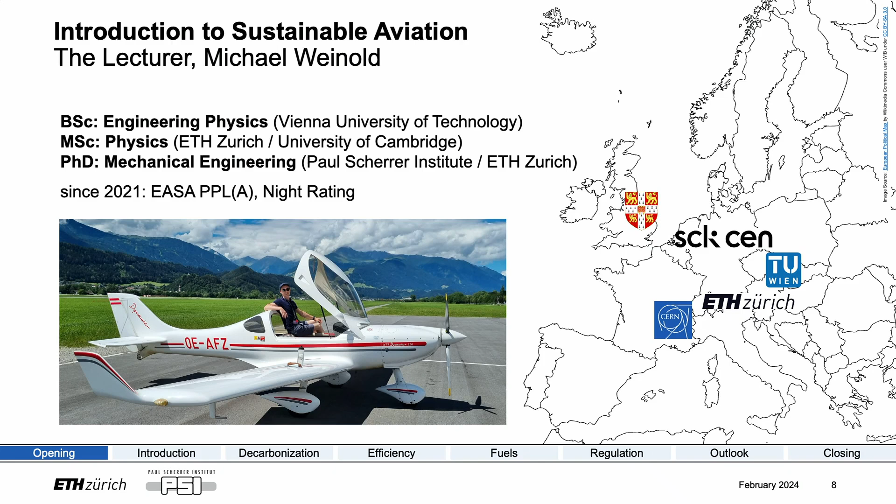Now, the research that we do, both at Paul Scherrer Institute and ETH Zurich, is of course concerned not primarily with aviation, but aviation as one of the sectors with hard-to-abate carbon emissions is of particular interest to us, and we have aviation domain experts in our group, including our group head, who has a background in aerospace engineering from a university in the United Kingdom, and then various researchers who deal with questions of sustainable aviation fuels and the supply chain underlying them.

We've in the past collaborated with various entities of the Swiss government, with the European Union Aviation Safety Agency, Airbus, Synhelion, and EMPA. So if students are looking for either a bachelor's, master's, or project thesis, I encourage you to check the websites. There's various opportunities. Of course, we're not as hands-on as some of the student projects that actually build aircraft, either hydrogen or battery-powered, but we take a system-level approach. So if you're interested in modeling, computer science, I encourage you to take a look.

Now, something definitional. Sustainability, of course, is a very broad term, an umbrella term, but what I'll be focusing on in this lecture, also because that's primarily what I've been dealing with in my own doctoral research, is sustainability in the environmental sense. So we won't be delving too deeply into the economic implications of, for instance, switching to different fuels. But we'll take a look at sustainability in the sense that we'd like to continue flying for the foreseeable future without accumulating environmental burdens.

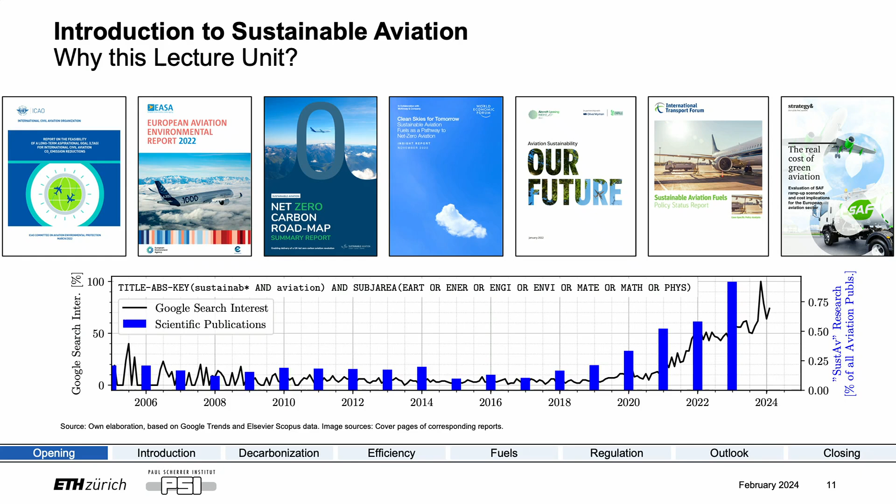We are in Switzerland, of course, very fortunate to have, considering the size of the country, a very strong aviation industry, and I've just selected a couple of entities, and of course there is no mention of completeness here. Entities in Switzerland that deal with sustainability in aviation specifically. So, for instance, the European Flight Academy, that's training aspiring Lufthansa and Swiss Air pilots, is soon to transition to battery-powered DA-40 aircraft, therefore decarbonizing completely at least one part of the flight training of aspiring pilots.

We have Swiss, who is active in the adoption of sustainable aviation fuel, as is the Lufthansa Group at large. IATA has entire teams working on assisting airlines in both meeting the reporting standards for emissions that have been implemented by ICAO and in transitioning to more sustainable fuels. Skyguide has projects, so the club has hosted an event only very recently where we had Christian Weiss, senior staff from Skyguide, mentioning what they're doing and trying to decarbonize Swiss airspace.

So the goal of today's lecture is perhaps not so much to prepare you for the exam. As many of the students who've already taken Aviation 1 know, there's only 1 or 2 questions from this lecture that are going to make it into the exam, but it's much more trying to give you a high-level overview of the topic and contextualize, as I've mentioned, other reports.

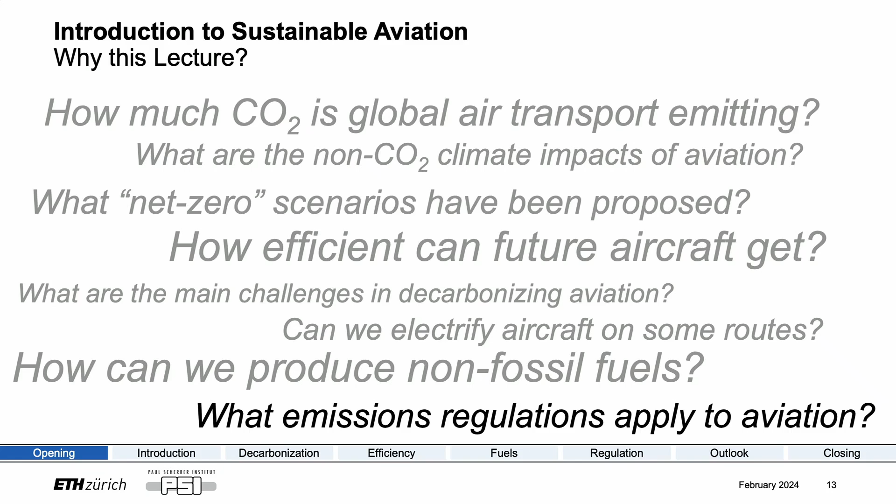So the table of contents is as follows. We have a short introduction that's supposed to motivate the lecture: aviation and the environment, aviation and technological change, and no simple solutions, which is a bit unfortunate, but at the same time, perhaps the reason why I have to hold this lecture in the first place. Then a brief section trying to split up the topic into 3 levers accessible to policymakers: increasing efficiency, making fuels non-fossil or at least decreasing the carbon footprint of the fuels, and regulating aviation. That could either be carbon taxation, carbon offsets, efficiency limits, fuel blend mandates, or flight bans, as has recently been introduced in France. A little spoiler alert, even though evidently a flight ban has been imposed on some short-haul domestic routes, none of them are actually affected, so that's quite the case study in how a bill becomes law. And then an outlook at the very end. Good.

Short introduction. So maybe just for context, the first powered flight, 1903, Wright brothers in Kitty Hawk, a 12-horsepower motor, flight distance just short of the wingspan of the Lockheed Constellation, which was incidentally also the last aircraft that Orville Wright was ever able to fly, in a flight organized by, well, the name eludes me now, but shortly before his death he was able to take to the skies again in a commercial passenger airliner where the wingspan was larger than the flight distance he had covered in his initial flight.

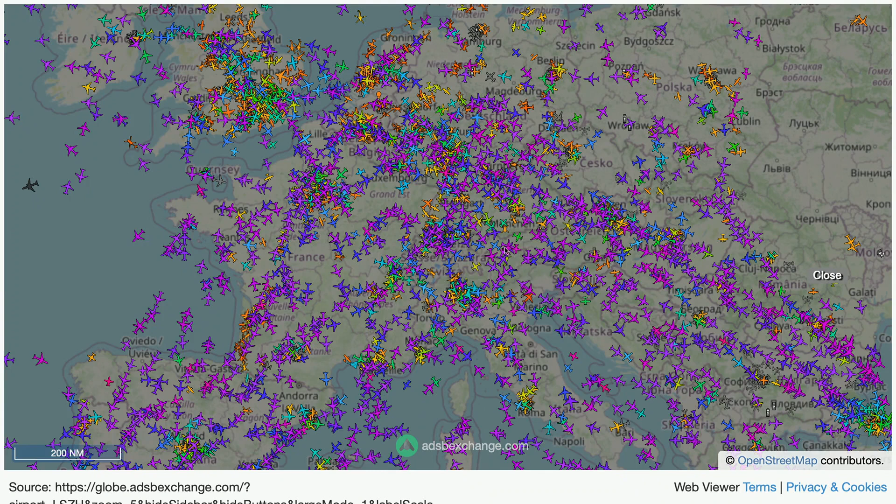This is a live picture of the sky above, well, it's centered around Switzerland, but it's really Europe. And I think you can even check where the aircraft are flying. So zooming into Switzerland, and maybe checking, coming back from Thailand. Well, so you can see air traffic has grown almost exponentially. I'll have some data on this, but I think it's instructive just to zoom out a little and get a visual feel of the amount of air traffic that's currently airborne.

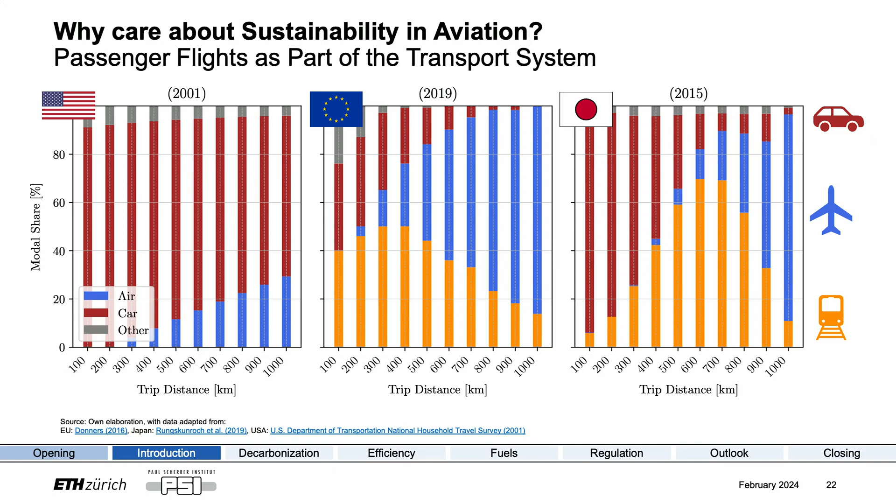This already gives you an idea of how difficult it is going to be to decarbonize aviation, or even through policy measures to enact effective measures to reduce unnecessary air travel. Because even for cases where there is significant economic advantage, there is still a large market for air transport. We had Martin Tyler in the Aviation I course, an expert in air cargo who worked for CargoLogic for a long time, and students who took Aviation I may remember some of the advantages of air transport when it comes to other modes of transport.

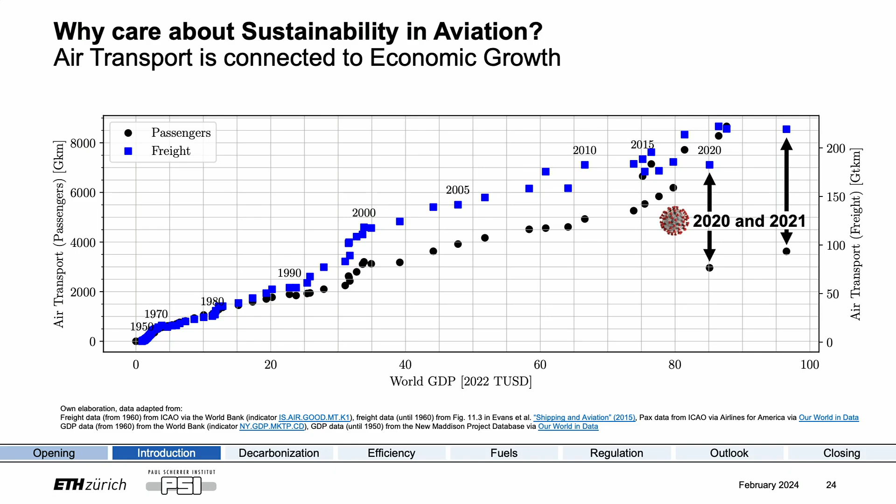Now, this is interesting. Of course, this is about as aggregate as you can get, looking at global GDP and global numbers of passenger kilometers. What's more interesting is to learn where growth will come from in the future, by looking at different countries.

What is reasonably well established is the regression, or correlation, between personal income and the propensity for air travel. What's also reasonably well established in economic literature is the bidirectional relationship between economic growth and air travel, especially in developing nations - which essentially translates to: if you can't fly between two cities, there's going to be very little commerce between them. So we can expect, as developing nations hopefully transition to service economies away from purely resource extraction economies, emissions from Africa and Asia to grow significantly, especially Southeast Asia.

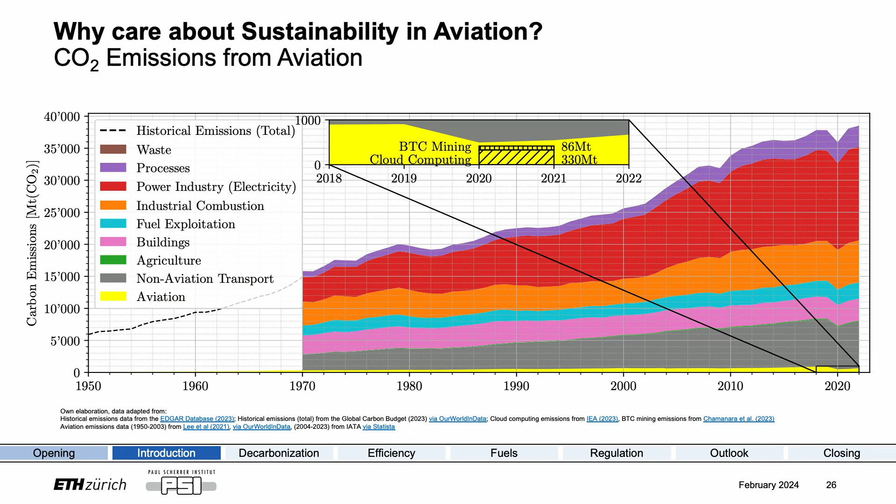Unfortunately, the non-CO2 emissions—any other warming that comes from changes in cloud cover, persistent contrails, direct interaction of radiation with aerosols and so on—is also significant, and at least on the same order of magnitude as the warming attributed to increased carbon emissions.

Now, you could ask how quickly we could reduce carbon emissions by, for instance, banning domestic flights or short-haul flights, or flights up to an arbitrary number of kilometers or hours flown.

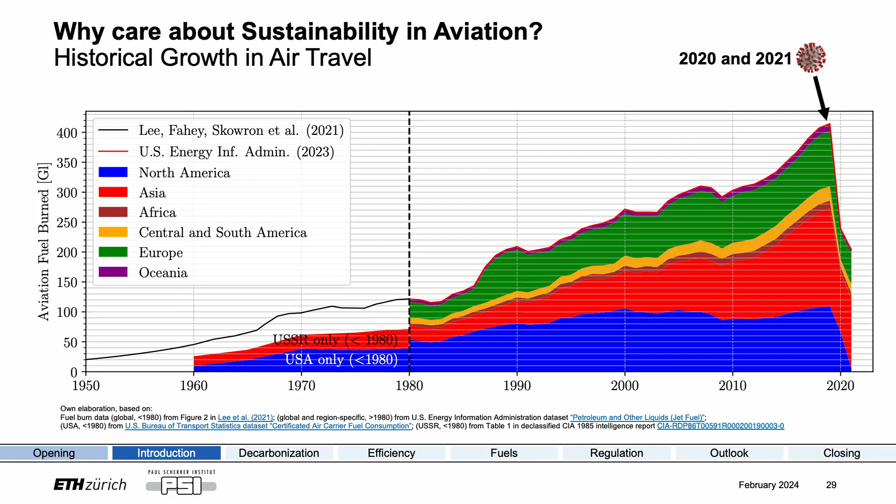About these emissions, we've seen that it's difficult to decarbonize aviation because we can't just ban short-haul flights, and even if we did, that wouldn't really make a dent in the overall emissions. We've seen where growth has taken us.

Now the question is, what are the actual emissions that we care about in aviation? Here I've classified emissions other than CO2 as other emissions, which is essentially noise emissions, particulate matter, and NOx and other soot particles. Now, all of these are essentially beyond the scope of this lecture.

We will have an aviation expert from the Federal Office of Civil Aviation, Theo Rendlisbacher, who's active in various committees of ICAO, actually writing the legislation that tries to find a trade-off between, for instance, fuel efficiency, so thermal efficiency in the turbofan engine, and NOx emissions. And I would ask you to direct all questions on these emissions to him.

There's some visually striking images, so we have made strides in, for instance, reducing particulate matter, because there's no more water-injected takeoffs, at least not in civil airliners, and even in the military ones. There's now more or less high bypass turbofan engines. In terms of noise emissions, relatively stringent rules are in place.

In fact, to my understanding, there is a chance that if noise emissions, which have been successively lowered by ICAO, continue to be lowered in this way, we might actually be able to grow globally noise neutral, which is a bit of an interesting term, but this would just mean that the global blanketed area that receives more than 55 decibels of day-night average sound would almost stay the same over the next 20 or the next 30 years, even at currently significant growth levels.

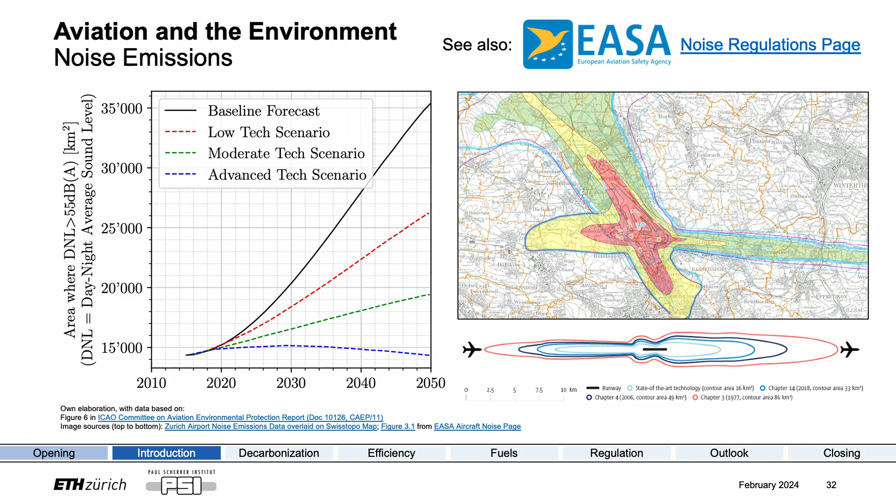So you can see that this is, I think, for—I don't quite know what decibel level this is, might be 79—but what you can see on the lower right here is how the blanketed area has decreased as per the different noise emission standards. And above that is an image that shows essentially the same for Zurich airports.

So what we are more interested in this lecture is warming effects of aviation, and this could be contrail cirrus. So these are high-altitude cirrus clouds that form from contrails. Could be low-altitude clouds that form from soot particles that are emitted into the atmosphere. Could be contrails themselves, although that's a negligible part. Could be sulfur in the atmosphere and other soot, and of course carbon dioxide.

Now, before I show a figure that shows you how much the atmosphere is actually warming from aviation, from both CO2 and these non-CO2 warming effects, I'll briefly have to show this for context.

What this shows is that there's two different kinds of emissions that we care about in aviation. One is the long-term emissions, which is carbon dioxide. This accumulates—you can see on the right-hand side—if aviation continues at present levels or even growth, then the levels of carbon dioxide, and from that resulting, the radiative forcing on the planet will increase, whereas there's short-term effects, like essentially all of these cloud effects, which are short-term on the timescales that we're interested in climate science, and they're essentially an emissions pulse.

So in the left figure, we are assuming an emissions pulse at time 0, and you can see that radiative forcing, and this would of course be a rather long-lived cloud if it actually stays up in the atmosphere for 20 years, but for visual consistency, I made that a very long-lived cloud. It decreases over time.

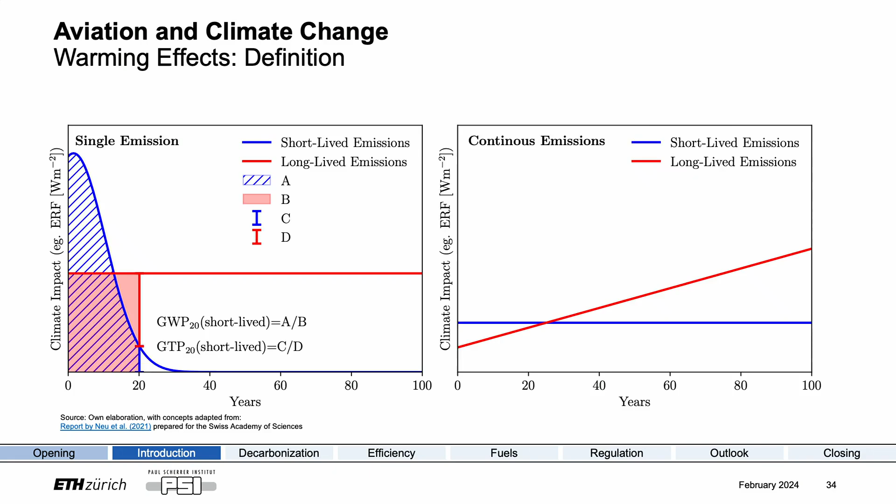Now, there's different metrics that you may or may not have already heard. There's global warming potential, there's global temperature potential, there's radiative forcing, there's effective radiative forcing. You don't have to care about most of them. What I'll be using will be effective radiative forcing, Strahlungsantrieb in German. The unit is watts per square meter, and this gives you a time slice in the warming equation, essentially.

There's an entire research group of the German Aerospace Center, DLR, in Oberpfaffenhofen that does only non-CO2 warming effects. And I've spoken to two of the researchers in preparation for the lecture. And this is centimeters per second updrafts that go into these models and essentially change the outcome from cooling to warming in these simulations. So it's complex physics or complex chemistry, like in the case of nitrogen oxide emissions.

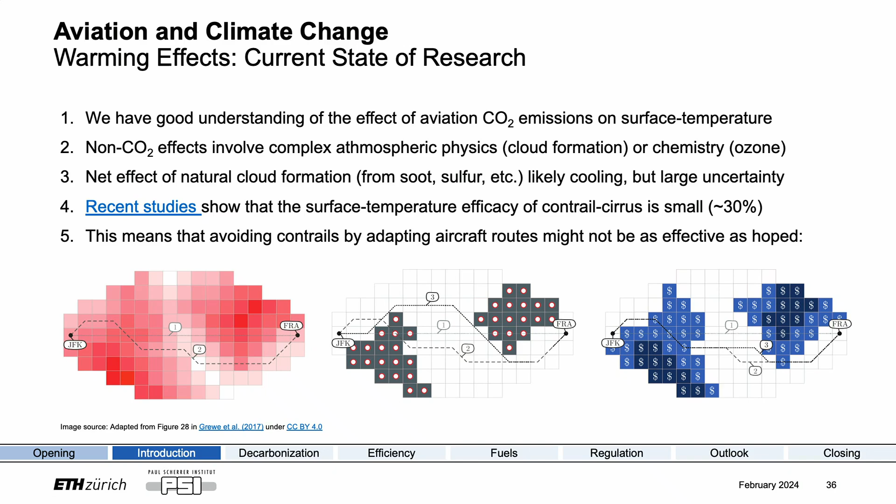So what people have suggested is making part of the airspace more expensive to fly through. This is very ambitious, not least of all because short-term weather forecasts are very difficult to generate. Google claimed very good results. I think they had a 2% fuel burn increase from rerouting or flying at different altitudes and a 50% decrease in contrails. But at the same time, a low efficacy in actual contrail warming would call this into question. So I would be very skeptical if any of these kinds of measures will be introduced in the short run. Also, because of this,

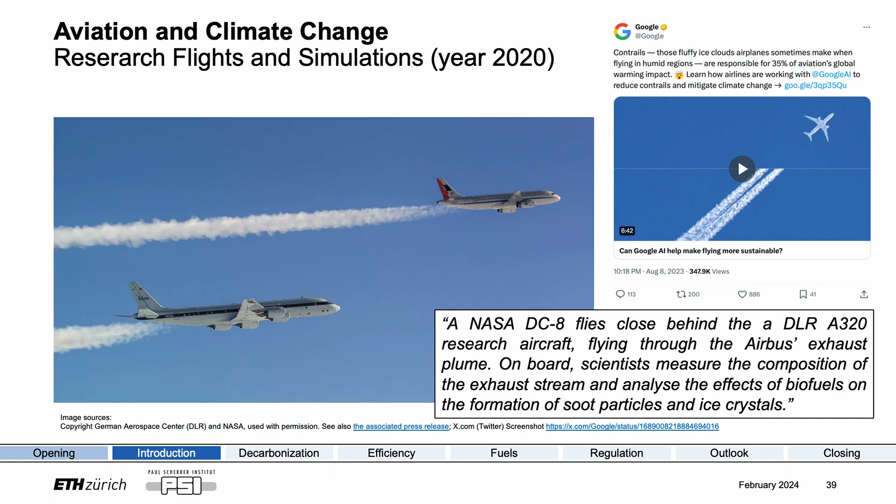Okay, so how much has aviation actually improved since the 1950s? And how much can we expect it to improve in the future? Well, it has improved by a lot, actually. Certainly more than any other mode of transport that I was able to find data on. I mean, there's really only three. I like this figure because it's for the United States, and I'm going to have you take a guess what happened in 1973. Yes, exactly. One of the many oil crises, or well, the OG oil crisis.

It's really funny, actually. So the two major shocks, the 2000s energy crisis and the 1973 oil crisis, were responsible for significant improvements. The Department of Energy introduced policy and funded research, etc. And the same is essentially true for aviation. So the next question is, why was there a significant increase in the energy intensity between 1950 and the 1970s for aviation?

Yes, exactly. This is fleet-level data. So in 1950, there was no commercial jet aircraft, and then they were introduced. So it really makes sense to compare the 1970s to today, but because I was able to find data all the way up to 1950, I decided to do that.

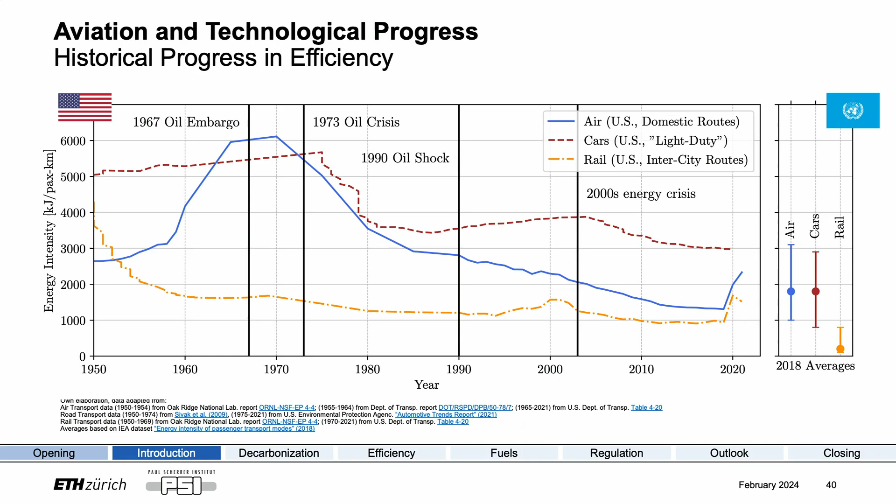It's essentially this. Steam power, diesel power, electric power. This is also captured here. So I do have rail data going back all the way to, I think, 1950 in the United States. And what you can actually see is there's still some steam engines that are being replaced in the figure before.

The issue is, of course, if you have higher efficiency in any appliance or service that consumes energy, what do you expect? Do you expect people to consume the same amount of the service or the appliance? No. This is called the rebound effect. And while I won't go into this in detail, we should keep this in mind. If there is no rebound effect, what this means is... Efficiency in these figures is the incline, the slope of the lines.

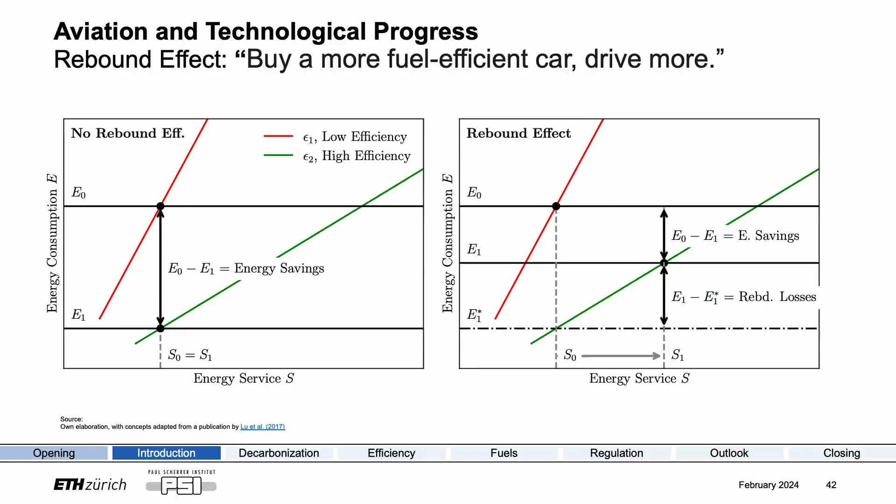You consume the same amount of the service, but due to higher efficiency, you consume less energy. If there is rebound effect, generally you expect to consume more of the service and thereby offset some of the gains. Of course, one part of the rebound effect is marketing, and this has been especially prevalent in automobiles and in cars.

But now, no simple solutions, or the reason why we have the lecture on sustainable aviation. Why not just electrify aviation? Well, the issue is essentially this. What I have plotted here is on the x-axis, the gravimetric energy density, so how much energy is there per kilogram in an energy carrier, and on the y-axis, the volumetric energy density, so how much per volume.

Kerosene, which might actually be an issue because kerosene in English isn't quite the same as Jet A-1, but it's about the same. It's between kerosene and gasoline. It is all the way up there on the far upper right. Hydrogen, of course, there's a split in the axis, simply because the gravimetric energy density of liquid hydrogen is very good, so about 3 times that of Jet A-1, German kerosene, aviation fuel. And then on the lower left we have batteries, and that's a bit of a disappointment.

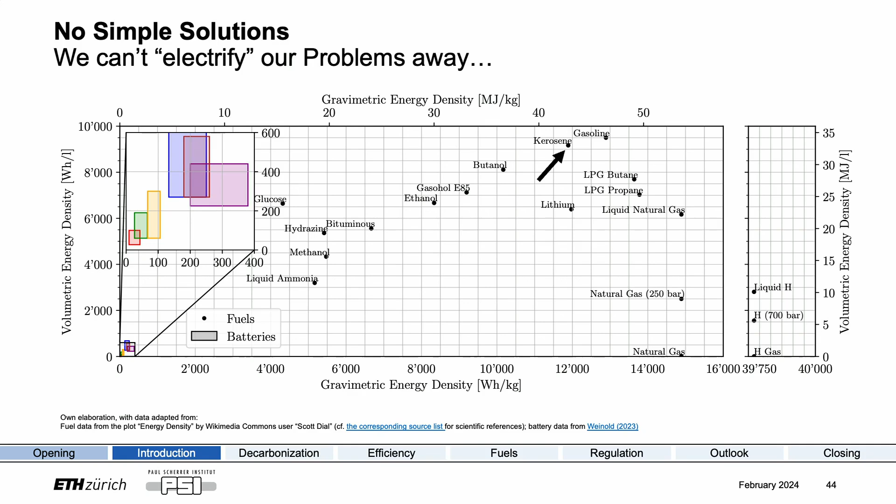We'll have to zoom into that, which we can do here. So there's the same axis, just zoomed in. Gravimetric energy density, which is more relevant to aircraft, and volumetric on the y-axis again. Now, the different colors correspond to different battery chemistries. The most prevalent, of course, being lithium-ion batteries, which are used from anything as small as this to the Tesla cars, which many of you may be driving.

And I've shown, and I think this is really instructive, the historical progress in the capacity of these batteries. Because when they were first commercialized, they certainly didn't have the same capacity as they do today. So you can see that for lithium-ion batteries, we start all the way down here in the 1990s. And 2020, the blue rectangle is the industry average, if you buy an off-the-shelf lithium-ion battery for presumably automotive use. And then the best performers are the little dots. We have 2 forecasts here, and I've added the physical limit.

So it's a very information-dense graphic, but this gives you all the information that you will need to assess whether you can actually replace aircraft on certain routes with battery electric aircraft. And for that I have data on the bottom figure. The bottom shows for commuter and for turboprop aircraft what share of the routes you could replace. This is based on estimates by the International Council on Clean Transportation. So the way we would read this is as follows.

We currently have an energy density of, like, 150 watt-hours per kilogram. That allows us to replace maybe 20% of commuter aircraft in the United States if we make them 15% less heavy. That's for lithium-ion batteries. At the physical limit, which at least according to current scientific estimates we'll almost reach, we'll be able to replace over 50% of commuter aircraft in the United States if they're 15% lighter.

Of course, no one's actually considering using lithium-ion batteries. What people are thinking of is more exotic battery chemistries that are not yet in use commercially: lithium air, lithium metal, and so on. I've added the physical limits for those also. So two of the limits are here. And current prototypes are this blackish gradient here.

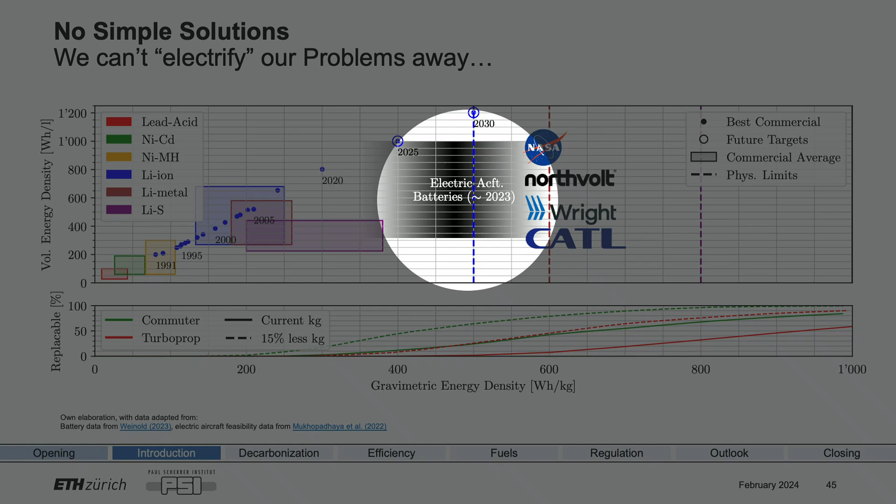So NASA, Northvolt, Wright, and CATL, which I think is a Chinese or a Taiwanese manufacturer, are all working on batteries for electric aircraft, and all the prototypes, not the projected future capacity, are in this range. So this means that there is hope to electrify aircraft on commuter routes, certainly. Turboprop aircraft, some of them, all of course depending on progress in batteries.

Progress in batteries is of course very much dependent on the number of batteries manufactured. This is called Wright's law. It's essentially a different version of Moore's law for processors, with Moore being improvement over time and Wright being improvement over implementation, so number of batteries manufactured.

Okay, so we can't electrify aircraft, or at least not all of them. So why don't we synth fuel our problems away? Why don't we use biofuels or synthetic fuels? Well, we can. Actually, if you fly to New York using any of the Lufthansa Group airlines, you can purchase sustainable aviation fuel that will be blended into the mix. Not just for your specific flight, because for certification reasons, not all aircraft can fly on 100% SAF. In fact, very few can currently. But much like with fair trade chocolate, Mengenausgleich, mass balance, this is added to other flights.

Unfortunately, it's a little more expensive. So current prices, I don't know how many of you have already purchased a ton of jet fuel, it puts you back around $1,000 currently. And SAF is all the way up there, in excess of 2,000. Singapore Airport wants to mandate all departing flights use SAF from, I think, 2026. But even the most liberal estimates from consulting agencies like McKinsey believe that this is going to be very much limited by the availability of synth fuels or biofuels in Singapore.

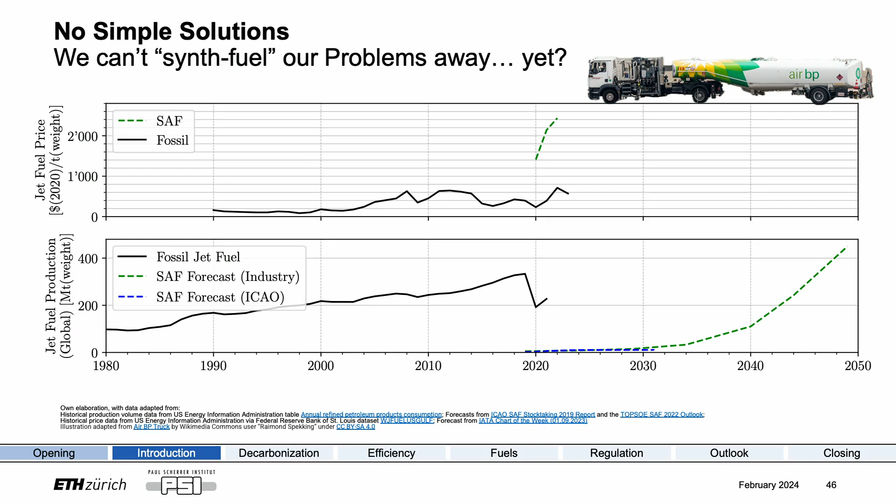Anyway, that's the forecast. Industry forecasts have this interesting tendency that whenever it's about implementation, they all grow exponentially, and when it's about reducing emissions, they fall exponentially. So you can see that here. Before I give you a short break, just some of the forecasts that are currently being used to try and estimate how we can get to net zero emissions by 2050. 2050, of course, being a very nice round number, no real bearing on reality. This is from Destination 2050, the European industry consortium, Waypoint 2050 being the American consortium.

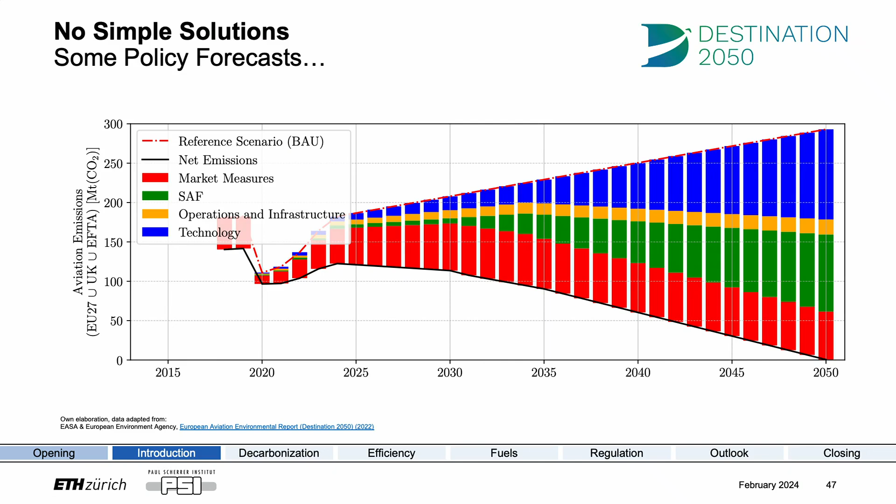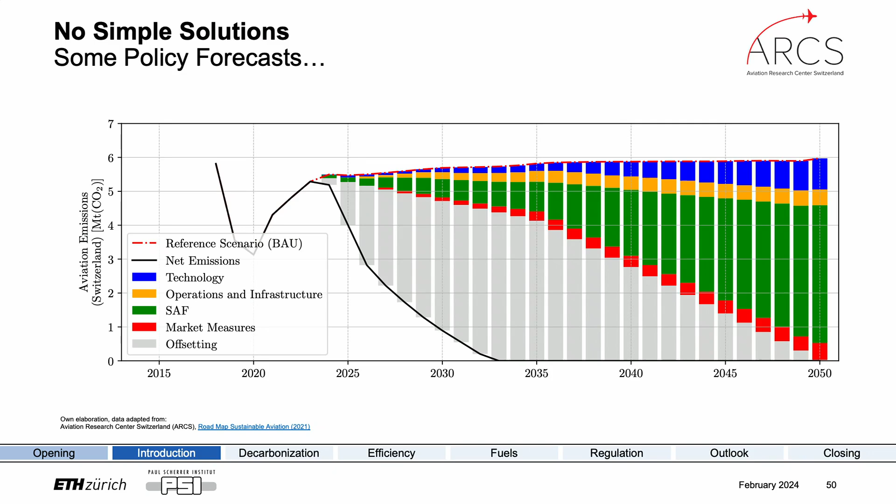And the people in St. Gallen believe we can just offset emissions forever. That's of course a bit of a misstatement, sorry for that. But here it's much more about offsets, and I'll get to offsets in the second part of the lecture. I've tried to compare them, and the lecture slides are going to be made available. But you can see that depending on the geographic locale, the policy environment, and the incentives behind whoever makes them, these forecasts are quite different.

And after the break, a 10-minute break, we'll go into all these different levers. So we have efficiency, we have policy, we have decarbonizing fuels. And that's essentially it. The key points are only for those that take the exam, so those are relevant. And I've added further reading and domain experts for your benefit, because the great thing about the course in general is that the guest lecturers are actually the people writing the legislation or informing the people who write the legislation.

I'm going to show you an equation, and I don't expect you to fully follow this, also because it's not really relevant. The relevant part comes on the next slide, but I would like you to have seen it at least once. This is called the Kaya identity. It's essentially a derivation of the IPAT formula, and all these names just go to say this is one way to split up the different levers we have to decarbonize any sector. Energy consumption, GDP, CO2 emissions, and population all go in there. Essentially, if you have a given population, the GDP per capita, the energy intensity per GDP, and the carbon intensity per energy, then you end up with carbon emissions.

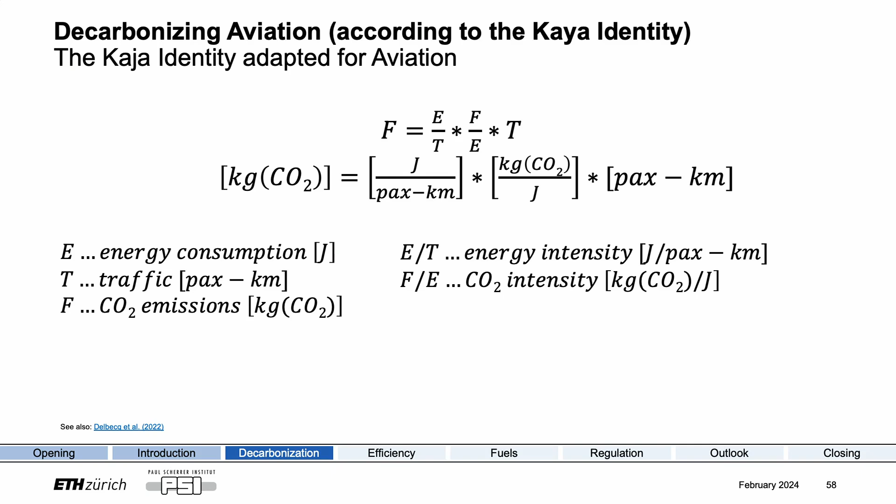Now, what's more interesting to us in aviation is if we adapt this slightly. It also makes this a lot easier. We have carbon emissions on the left side, E over T being the energy intensity per passenger kilometer, F over E being the carbon intensity per energy, and then the traffic. This formula gives us three factors, and along these three factors we will briefly proceed with this section. We have aircraft efficiency - new designs, new fuselage designs, new engine designs, new materials, etc. We have the fuel carbon intensity, which in this case is fixed. Generally, in the Kaya identity, this is dependent on the electricity mix, but in case of combustion engines, this is all in the carbon intensity of the fuel itself. And then we have the traffic, which is a proxy for the cost of flying or the availability of flying.

Now, you may have heard of Paul Ehrlich, a researcher, most prominent in the 1970s and 80s, who warned against the population explosion and the carrying capacity of the Earth. In his original IPAT equation, there was also the idea to reduce the world population, but since I have not yet degraded to the moral level of Paul Ehrlich, we'll set that aside for the moment.

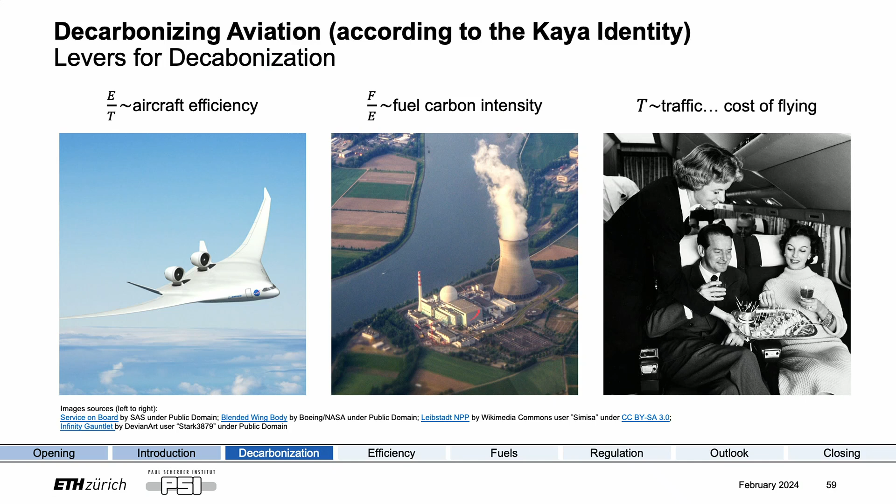Let's start with aviation emissions, aircraft efficiency. How has efficiency changed, and what are the physical limits, and how much can we expect this one lever to still contribute to decarbonizing aviation as a whole?

The 1950s benchmark is the de Havilland Comet, the first commercial jet airliner, a venerable aircraft that developed from the 1940s, first flight 1949, continued in service in a slightly modified version in the Royal Air Force until 2011, which I think is rather impressive - 110 built. Today's benchmark is the Boeing 787 Dreamliner, the first civil airliner with a composite fuselage, 80% composite by volume. Engines now, instead of having a 0:1 bypass ratio as was the case in the Comet, now have a 10:1 bypass ratio, and over 1,100 built.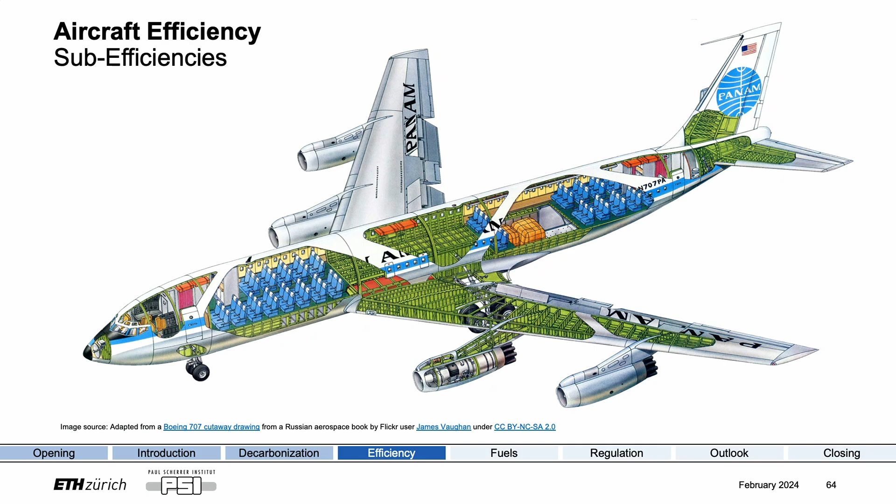If we look at aircraft efficiency, what scientific reports and forecasts usually do is they say, at the fleet level, over the past 10, 10, and 10 years, so the past 30 years in 10-year steps for whatever reason, we've seen a decrease of 2.4% annually compounded, which is quite impressive and the result of new aircraft entering service currently. But it's a very difficult metric to use because it's a compound metric and it really hides the fact that improvements in very different areas of material science, physics, and chemistry have led to this trend.

So what you actually have to do is not look at the overall efficiency, but split it up into engine efficiency, aerodynamic efficiency, structural efficiency, which essentially is a metric that describes how heavy the aircraft is in its ability to carry passengers and freight, and operational efficiency, which could be things such as load factor, so how full is the aircraft, but other things such as off-block time, how far the actual route or track deviates from the Great Circle route, etc. And all this makes up η, the overall aircraft efficiency or energy usage.

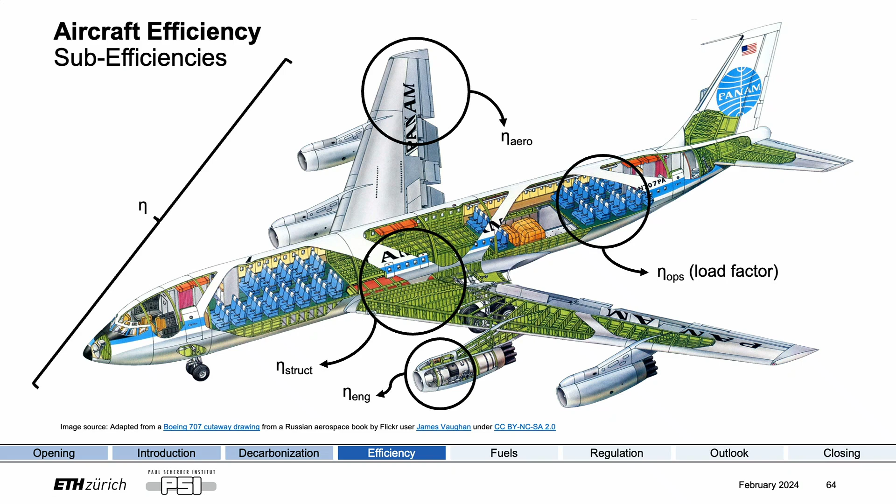Overall efficiency in units of megajoule per available seat kilometer, I'm calling that η here. There's various ways you can calculate this from open source data. Generally, this is a metric that is highly proprietary and closely guarded by OEMs. If you have ever had to deal with climate models or traffic models at the European level, you may know that Eurocontrol has good data called BADA, the Base of Aircraft Data. But even there, they do have the actual metrics provided by the suppliers. You have to sign a waiver saying that you won't compare two values. It's quite the disclaimer there.

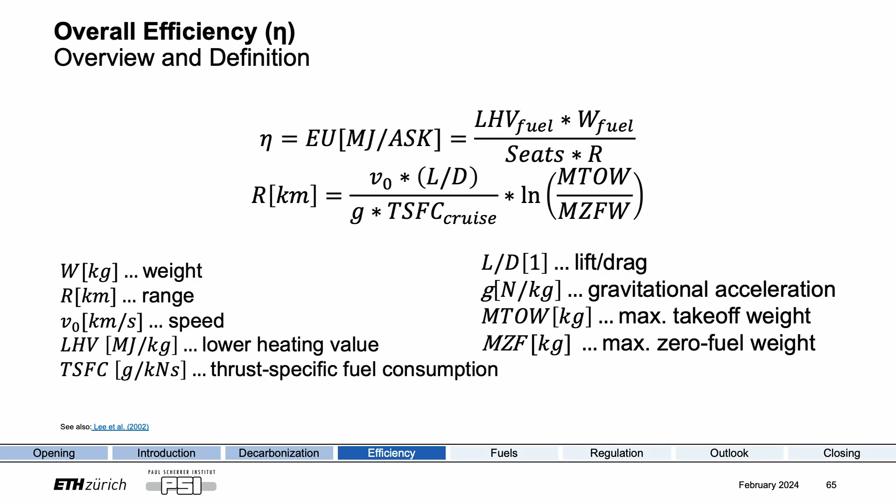I've included fleet average. Why are there some points that are worse than the fleet average? So why would you build an aircraft that has a lower energy, or rather higher energy usage, than the fleet average? Because it's a fancy aircraft with a fancy interior and less people inside. We've excluded those. So you're clearly describing the Gulfstream series of business jets, my favorite. But no, we've excluded those.

What this is, is smaller aircraft. But what you can see here is aircraft that are optimized for long range and for short range. So an Embraer 175 would have, we found, worse efficiency than, for instance, a 787, simply because it is optimized for takeoff and landing rather than cruise.

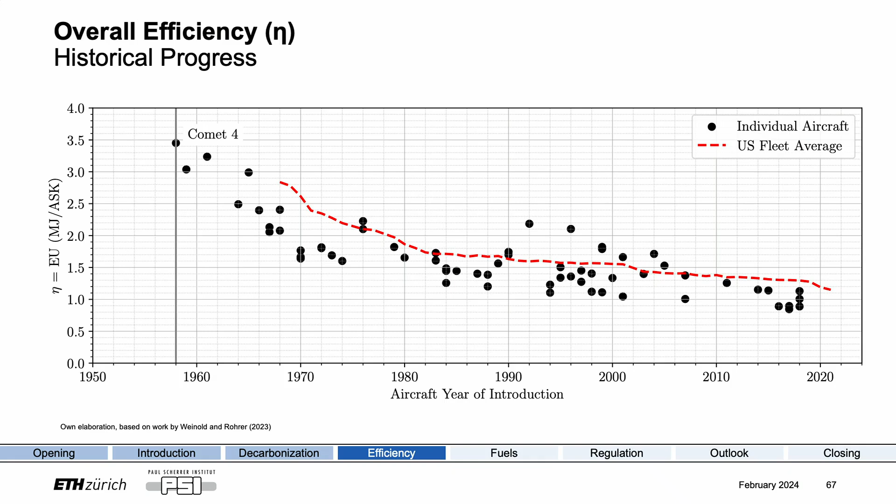And the question is, what was responsible for this? Fortunately, I had a master's student who was very good, by the way. We have spots for new master's students, if you're interested. And what I did with that master's student was disaggregate efficiency improvements in commercial aircraft. So we actually had a look at what was responsible. Was it the engines? Was it the aerodynamics? Was it the structure? And what we found was this.

Between 1958 and 2000, the majority came from engine efficiency improvements, the rest aerodynamics and structural. You can already see that it's a game of diminishing returns currently, and that over the past 20 years, aerodynamics have played the largest part.

Okay, we can start with structural efficiency. Let's delve into the sub-efficiencies. Structural efficiency just describes how heavy the aircraft is in relation to its utility in carrying passengers and freight. It's actually very difficult to find a metric that does all the aspects of an aircraft justice, including its speed, its range, its capacity to carry passengers and or freight.

So what we've done, since we had to do this from publicly available data, is use the operating empty weight over the passenger exit limit. Now, at the very end of the lecture, I'll get to something that ICAO has done to try and measure this, which is slightly different.

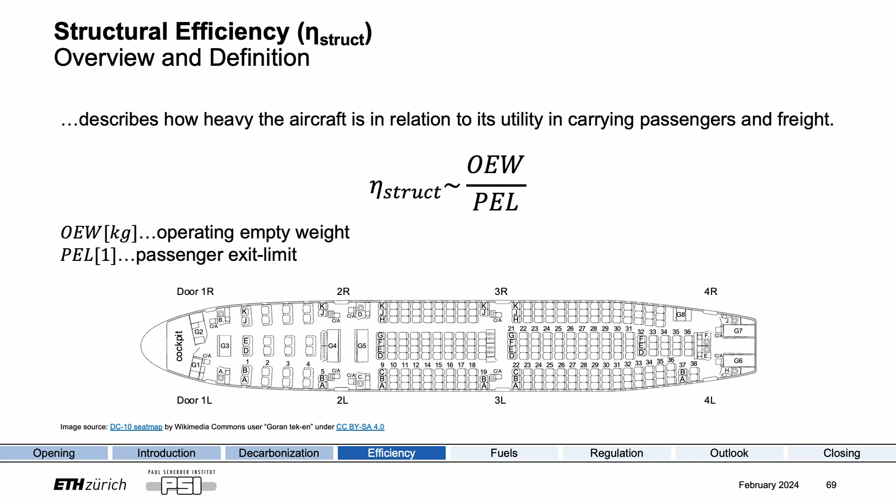We've used passenger exit limit, which is a certified limit rather than a technically feasible limit. That limit is also dependent on aircraft doors. So how many passengers you're allowed to fit into a plane is dependent on how many you can evacuate in 90 seconds, if I got that correct. This is dependent on the number of doors and the size of the doors, etc. So it's really an approximation, but it's the best we have.

We looked into this specifically for two aircraft, the 787, which is mostly composites, and the A330. I think the Neo, but that still is mostly aluminum. We found that the A330 has, in the variants we compared, shorter range and is also slightly slower. So this means the metric isn't able to capture everything.

Some things it does. We also see that lower is better. Wide bodies generally slightly worse.

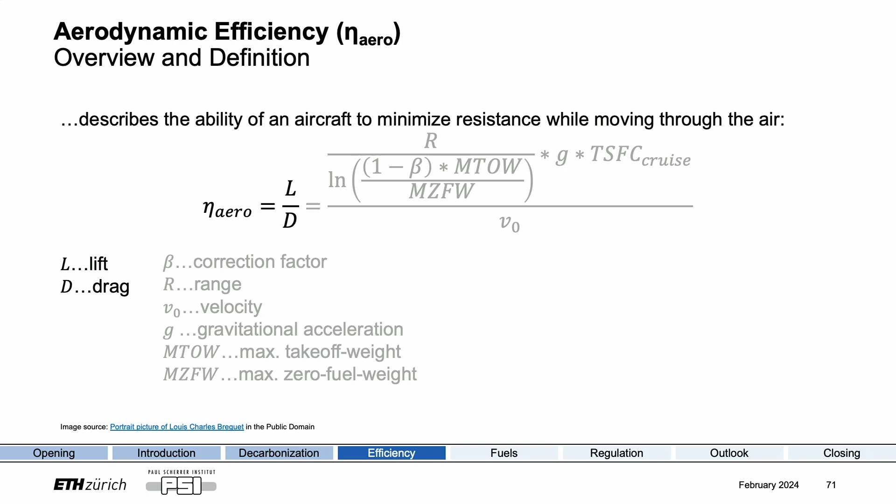Aerodynamic efficiency. We're essentially just using lift over drag. So if you remember Jürg Wildi, who has the aerodynamics lecture in Aviation 1, lift over drag we calculated by solving for it in the Breguet range equation, which I think Louis Breguet introduced, into which we're able to plug in the data that we have, and what we find then is this. And this is much more interesting, or visually appealing, if you will.

But we're essentially approaching the physical limits with current fuselage designs. There's some improvement still. I think Swiss recently introduced their shark skin, nano-textured foil made from polyethylene recycled bottles that gave them a 1.5% efficiency increase, I think, without fuel uplift. But this is diminishing returns. What you can see here also is that narrow bodies really are not optimized for cruise flight when it comes to lift over drag.

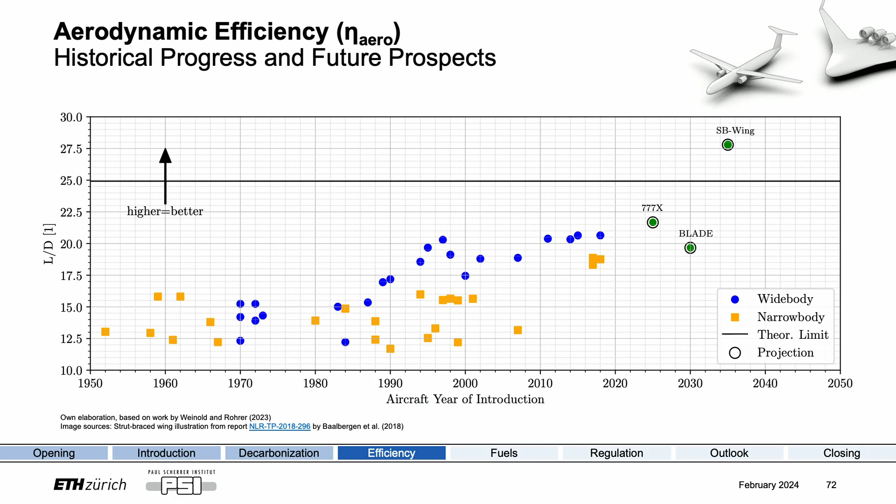Of course, one way to go above the current limits is by using blended wing bodies or a strut-braced wing. So strut-braced wing is the illustration on the left, and the blended wing body is on the right. I think Blade is a current Airbus or Boeing project. This would be one way to still improve efficiency when it comes to aerodynamics.

Engine efficiency is interesting because, as we've seen, between 1958 and 2000 it was responsible for the majority of improvement. We've split this up again into propulsive and thermodynamic, or thermal, efficiency. You can approximate propulsive efficiency by using exhaust velocity and velocity of the airplane, and thermal efficiency by using ambient and compressor exit temperature. The thermal efficiency is essentially the efficiency of the Brayton cycle. Turbofan engines fall into the category of the Brayton cycle.

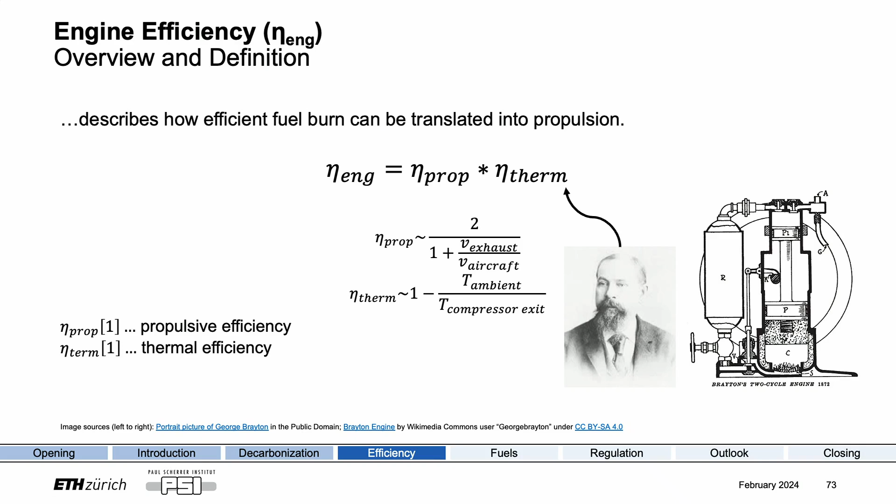And once you do this, you find that fuel burn improvement is essentially dependent on the bypass ratio, which is hidden in the propulsive efficiency equation. Generally, higher bypass ratio means lower overall exit velocity. And we're rapidly approaching viable limits.

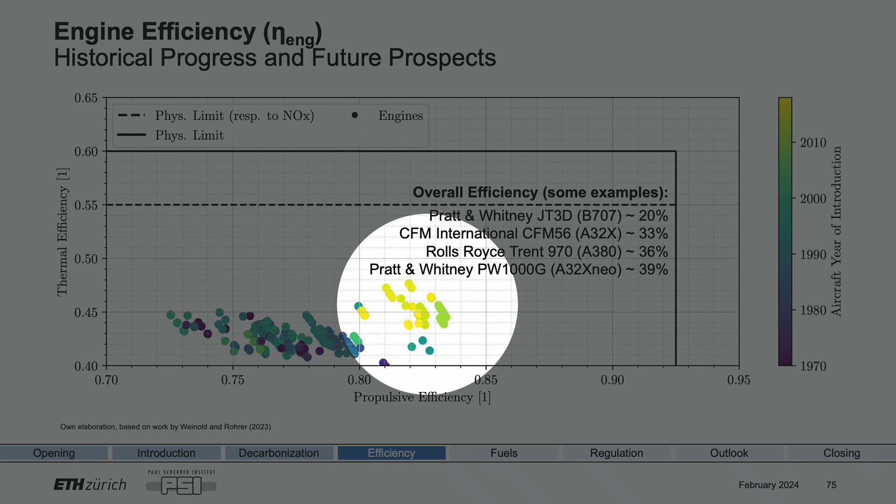This is only half interesting. What's really instructive is if we actually split up engine efficiency into propulsive and thermal, and then plot that. So we can see that, and here the color axis is essentially the year of introduction. We can see that the most recent engine generation, including geared turbofan engines like the Pratt & Whitney 1000, are in this cluster of lightly colored dots, and first and second generation turbofan engines are somewhere here.

The physical limit for thermal efficiency is non-negotiable. This is a matter of thermodynamics.

The physical limit with respect to NOx emissions is very much a matter of negotiations, and actually so in the most operational sense of the term, in that there are actual negotiations at the international level, at ICAO. Theo Rindlisbacher from Basel, who will hold one of the other lectures, so I encourage you to speak to him about this, is actually one of the people who has supplied test data, I think in collaboration with Helvetic Technik, or SR Technics, for the agency to make these determinations.

Higher core temperatures mean higher thermal efficiency. I think most of you have solved not a Brayton cycle, but maybe a Carnot cycle in your thermodynamics or physics classes. But higher temperatures also mean higher NOx emissions, and these are limited already, especially in the vicinity of airports, but also internationally. I've added some efficiencies here, so the engine that drove the 707 was around 20% overall efficient, and today we've almost doubled.

Now, operational efficiency is the last of the efficiency metrics. The only thing we've looked at here, because it's such a complex metric that hides how far routes deviate from the Great Circle route, what is the actual airborne time, what is the turnaround time, etc., is seat load factor, which is how many seats on average are filled.

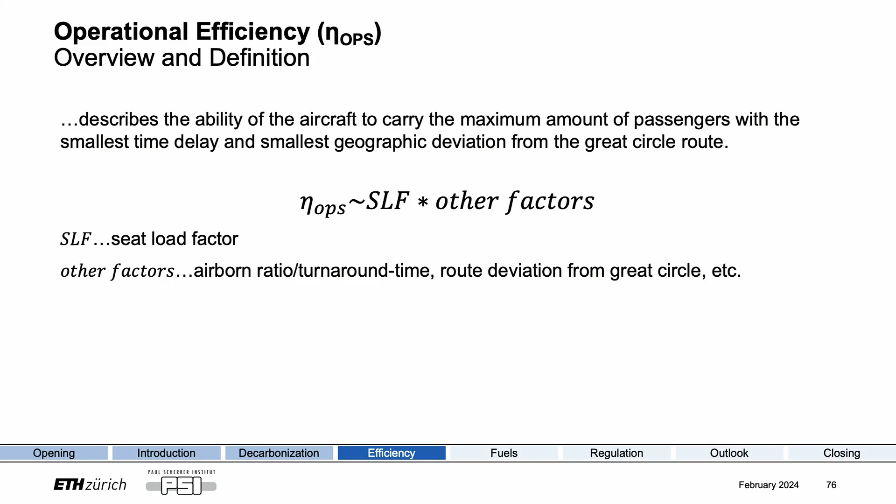I'm going to have you take a guess. At the fleet level, what is the current seat load factor of the international airline fleet in percent? It can't be higher than 100, that would be illegal. 60? Good guess, although maybe you're flying routes where there's not so much demand. It's actually a little higher. It's actually very high. Before COVID, it was approaching 80, 90% at the global level.

For some routes, of course, this is even higher. At least on all the Ryanair flights I've been on, it's certainly been higher. It was maybe even approaching 100. I've added rail transport occupancy rate also, just as a comparison. It's a bit of an apples to oranges comparison because rail transport serves a different purpose than air transport, at least in Europe. But still, Deutsche Bahn has an impressively high average occupancy of 50%.

So that's the one thing. This, by the way, also contributed significantly to overall energy usage reduction.

Just making sure, I just want to, in defense of Ryanair, from all the trips on DB I took, I think that they are at 120% occupancy. Yeah, certainly feels like that. Was it Ryanair that suggested that people actually stand in the back of the plane? Well, that would be approaching 100 or going above 100. Yeah, no.

I mentioned that we wouldn't go into this, but just because I was able to make such a nice figure, I'll show this also.

Operational efficiency also includes route deviations. And since part of this lecture is supposed to further your ability to ask critical questions, I don't know if you've actually read the My Studies description. I have 4 routes here, and there's, I think, 8 reasons for which the actual track deviates from the Great Circle track. Can you name all of them?

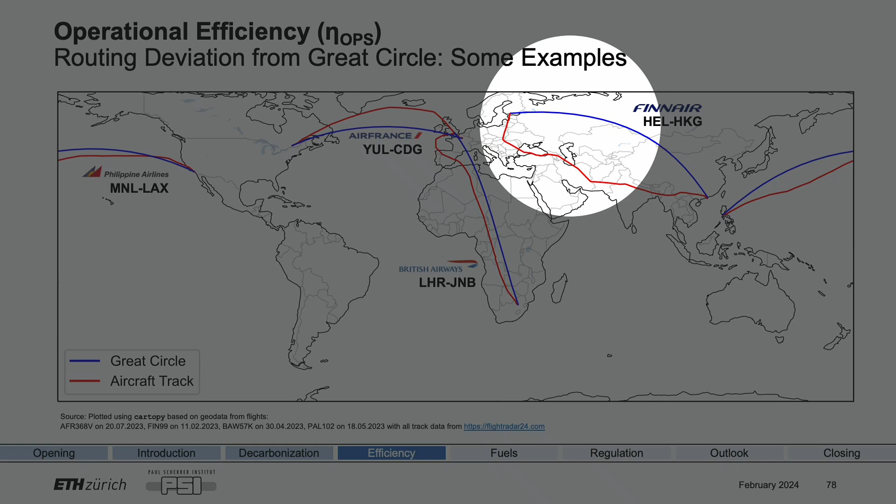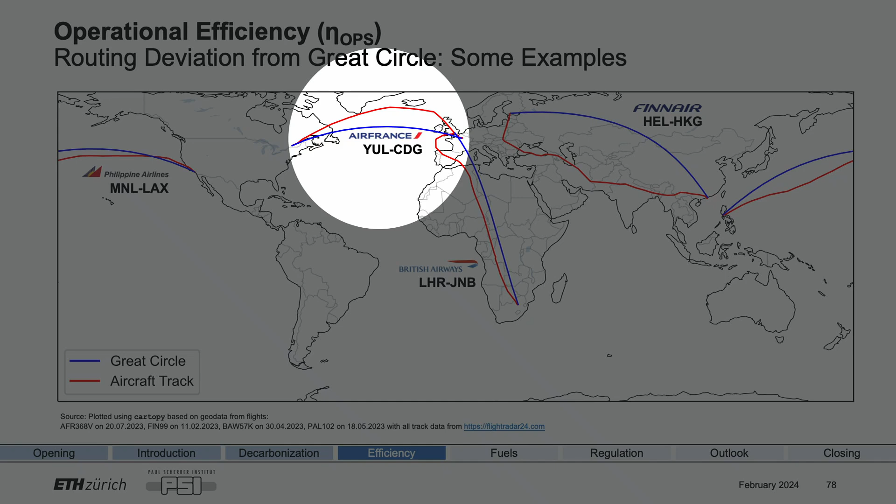And the interesting thing here is, this is a bit of a special flight. This was a delivery flight of an Airbus A220, a Bombardier C series, from Montreal to Charles de Gaulle. And evidently, the ETOPS rating, maybe only on that specific flight, or maybe for the aircraft in general, wasn't high enough, so they actually had to fly closer to Iceland. So that's another thing. I think you can see 2 more.

Yes? Yes, excellent, that's the one from Manila to LAX. So over the Central Pacific, there's no airspace closures, I don't think. So they actually chose to stay within prevailing winds, or well, maybe not jet stream in this case. And there's one more, this would be on London Heathrow to Johannesburg. This one's my favorite, I think you can see the strike of the French. Yes, the French are always on strike. So we could save the climate by just forcing them back to work. Yeah, so there's a couple of reasons.

There is research into how much the collapse of communism actually improved aircraft efficiency by Western airlines being able to overfly Russian airspace. Of course, we're in the reverse now. But this is all, unfortunately, beyond the scope of this lecture.

Okay, well, the key points were: looking at fleet level efficiency is only somewhat instructive. You need to look at sub-efficiencies, engine, aerodynamics, and structure, and operations, if you're interested. Energy intensity has decreased 90% compared to the Comet 1, but it's a bit of an unfair comparison, and 75% compared to the Comet 4.

Fleet level, around 50. The rate of improvements are likely to diminish unless revolutionary rather than evolutionary approaches are adopted, at least in fuselage design. You've seen that with the strut-braced wing and blended wing body. And potential for improvement in operational efficiency is small, but efforts are underway.

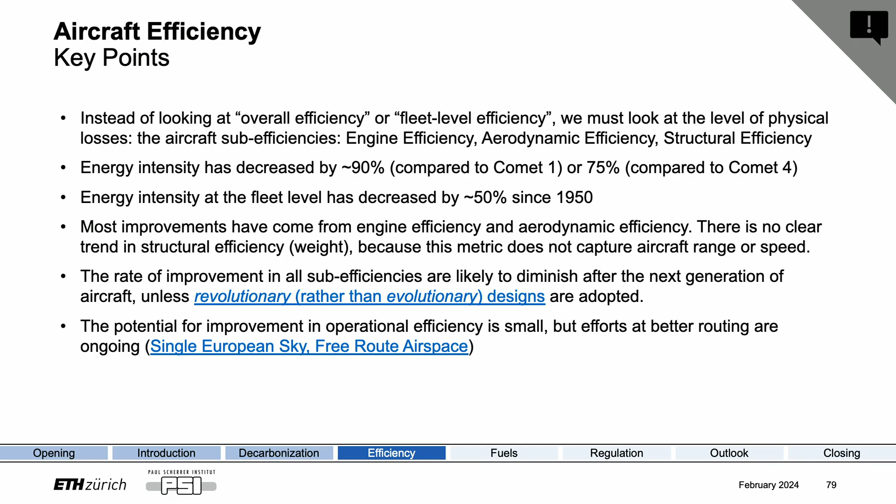Here I would actually encourage you to read some of this after the lecture's over. This is very interesting research, trying to really understand at the high level how we can improve the efficiency of the entire aircraft fleet.

Okay, so in the Kaya identity, we've looked at efficiency. We can now look at fuels, more specifically non-fossil fuels, because that would sort of be the whole point. Generally, when we talk about non-fossil fuels, we're talking about 2 kinds of fuels. We're talking about biofuels, or fuels derived from biological sources, or feedstocks, and synth fuels, or fuels derived synthetically, i.e. industrial chemically produced feedstocks, such as captured CO2, syngas, etc.

Now, how do you even measure the carbon footprint of fuels where the supply chain is really complex? Because the supply chain of these non-fossil fuels is really complex. Even the supply chain of fossil fuels is rather complex if you actually include the entire life cycle. The oil rig needs to be built. There needs to be maintenance on the oil rig. You need to actually ship the oil from the desert somewhere to a refinery, etc. The refinery has losses. All that incurs carbon emissions.

The method that's used to do this, and this is the expertise of the people in our group, and dare I say my own expertise, is life cycle assessment. It's a standardized methodology. There's an ISO standard for it, although that is rather vague. And that essentially determines the emissions that are incurred throughout the entire supply chain of a product or service, and the associated environmental burden.

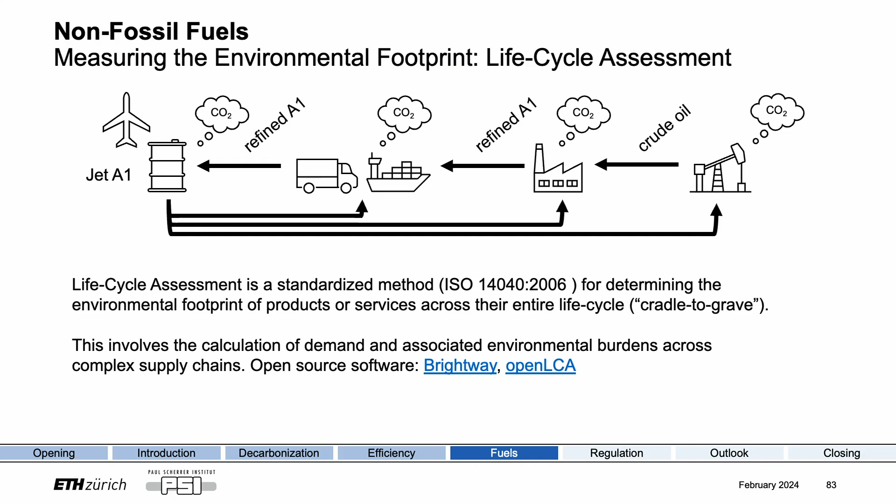There's two research groups in the United States that deal with this. There's one at MIT, the MIT LAE, Lab for Aerospace and the Environment, and there's one at Georgia Tech. It has a large aeronautics program, and the group at Georgia Tech actually calculates the carbon footprints that go into these tables that the ICAO, the International Civil Aviation Organization, has prepared that determine which supply path or which fuel path has which carbon footprint.

I'm not a chemist or a chemical engineer, but I will give you a very short overview of the different pathways that you can have to get to these different non-fossil fuels. So first we have biofuels, and they have this nice logo here spelling out CORSIA. I didn't write down what CORSIA actually means, but it's the ICAO program that does two things.

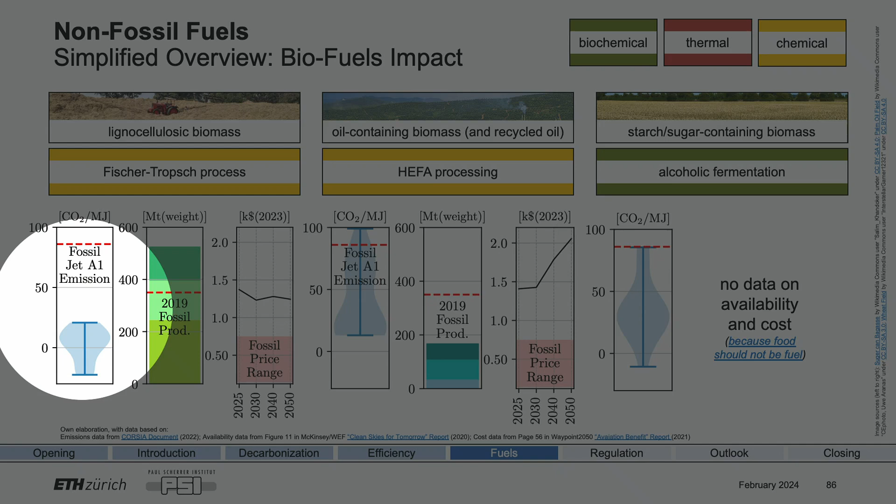These specific crops that make up the majority of the, as you can see, that's a distribution, so the majority of these fuels actually enrich the soil, so they sequester carbon into the soil, at least when compared to the crops that would have otherwise grown there, according to these studies. So there's that. It's a matter of which study to take and the assumptions. It's a bit unfortunate I can't go into this a little more. But this is the way it looks. So we would have enough, it would be very expensive, and the carbon footprint wouldn't be that bad.

Now, synfuels are slightly different. There's no biological precursors. Instead, we have nitrogen, electricity, water, and CO2, captured either during industrial production, or directly from the air. There's a Swiss startup that tries to do this in Iceland.

And there we have the other process, which you should be interested in if you want to pass the exam, or if you're interested in the history of civilization, which is the Haber-Bosch process, which does what? I'm sure everyone's heard of the Haber-Bosch process. Yes, it turns nitrogen and hydrogen into ammonia, which is the precursor for industrial fertilizer.

So it was the dynamite of the population explosion. And unfortunately, the reason World War I lasted 4 years and not 1, because again, Germany didn't have natural deposits of nitrogen, unlike the British did. So there's that. The pathway that is interesting to ETH students, or should be interesting, is this one. The solar redox cycle is something that an ETH startup is actively developing. Aldo Steinfeld's former group, professor just now retired, Department of Mechanical Engineering, has been working on this intensely.

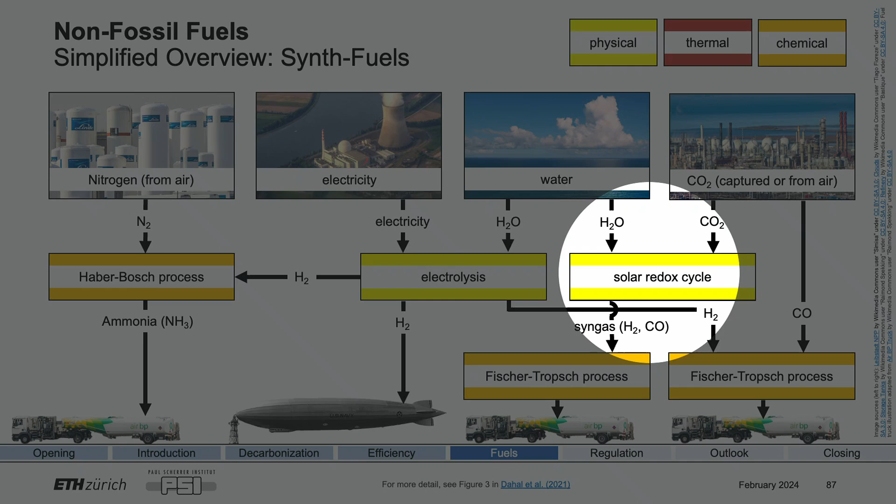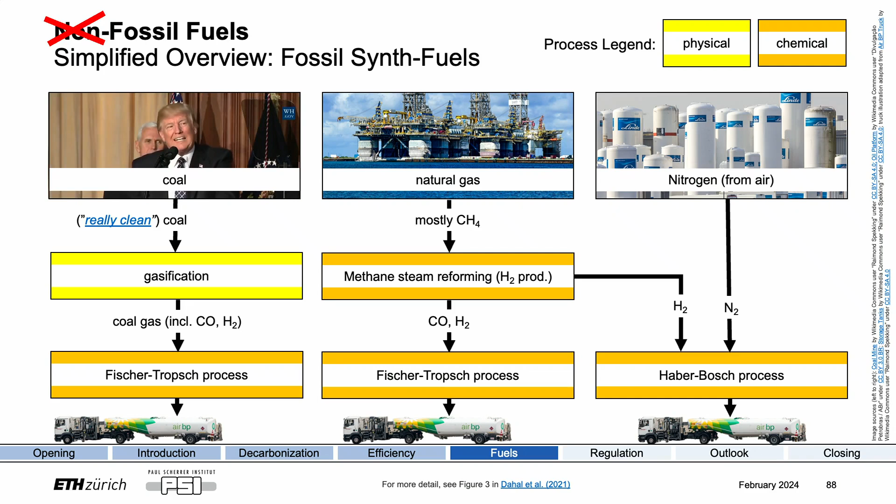For completeness, I've also included fossil fuel synfuel pathways, because there is a significant interest both in terms of research and in terms of scaling up from the militaries around the world, including some interest from Armasuisse, and of course the United States Army is one of the largest research agencies into non-fossil fuels. This is essentially the pathways that I mentioned earlier, relevant to German war efforts in the two world wars, and starts from coal. Going to have clean coal, really clean coal. And maybe if we have clean coal, it will be a non-fossil fuel, who knows? Natural gas and nitrogen.

Now, these are the pathways, so it's not so complicated. One thing I have left out is the refining, so there's other processes in there, but that's the gist of it.

Now that we have the fuel, can we actually fly with it? That's a good question. Yes, we can. Unfortunately, that's more of a certification issue than a technical issue. There has been a flight, is that November 28th? So I'm guessing that was then. So 3 months ago, across the Atlantic using 100% SAF. SAF made from,

did anyone actually read the press release? Did anyone hear about the 100% SAF flight? Do you know which pathway that was? It was oil. It was recycled cooking oil. So maybe Belgium will save the planet.

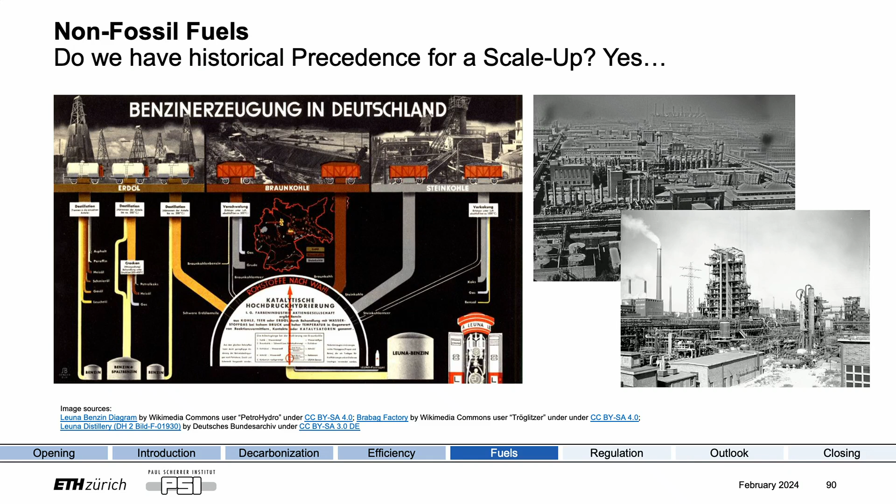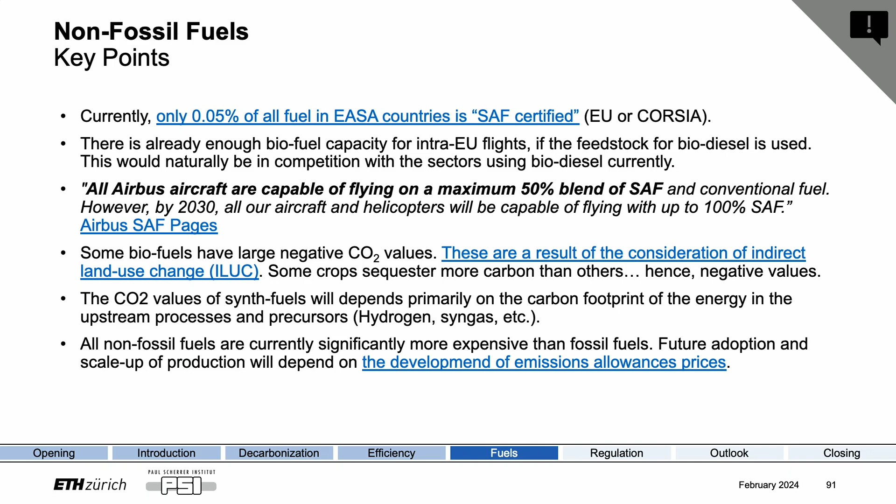Now, key points. 0.05% of the fuel in flights in EASA countries are using synfuel, or part of the blend is synfuel. There is enough capacity, although this would take away biodiesel, for instance, from other sectors, so it's always a competition between sectors. Airbus aircraft are able to fly on 50% SAF. I've included some links on the negative CO2 emissions values. Might be interesting for you to look into. And it's all terribly expensive currently, and expected to be so until 2050.

I think another short break is in order. Thank you.

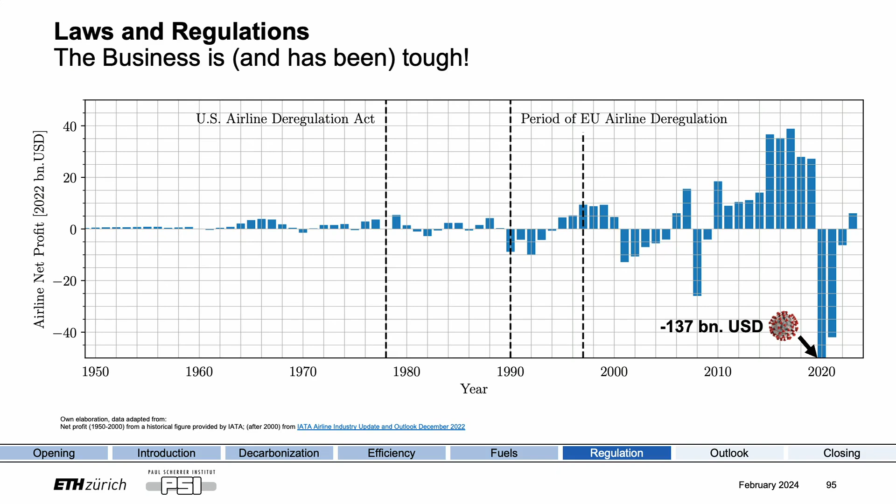I think we can take flight again, because now comes the most interesting part of the lecture: laws and regulations. Fuel blend mandates, carbon tax, efficiency mandates, I suppose, and the French flight ban. Right, so the context for this is that business has historically been and continues to be tough. This is airline net profits from the 1950s until today, with the line for COVID essentially going down up until here.

So in this context, 5 different relevant regulations or laws have been enacted over the past years. We have efficiency limits enacted at the international level by ICAO. We have what is essentially a carbon tax, also ICAO, under the CORSIA scheme. We have fuel blend mandates within the European Union, a carbon tax within the European Union, and we have the French flight bans. If you should ever find yourself in the unfortunate position that you would actually need to go to the corresponding law, I've listed them here. If you're fortunate enough not to, then this will suffice.

So, fuel blend mandates. The European Union, as part of their European Green Deal, has introduced a Fit for 55 package, where they want to reduce carbon emissions by 55% compared to 1990s levels. And as part of this, a law has been passed that mandates how much the blend of non-fossil fuels has to be in all aviation fuel. So it's a mandatory minimum and a successive increase. This is what the minimum looks like.

So we're currently in 2025, was it like 2%? In 2050, it will be in excess of 60%, and of that, 18% need to be synthetic, so non-bio. Is there currently enough fuel to fill the demand? Well, sort of, only for domestic routes if we use all the biodiesel that's available to us. According to McKinsey, that was the source for the availability of the lignocellulosic biomass pathway previously, there is.

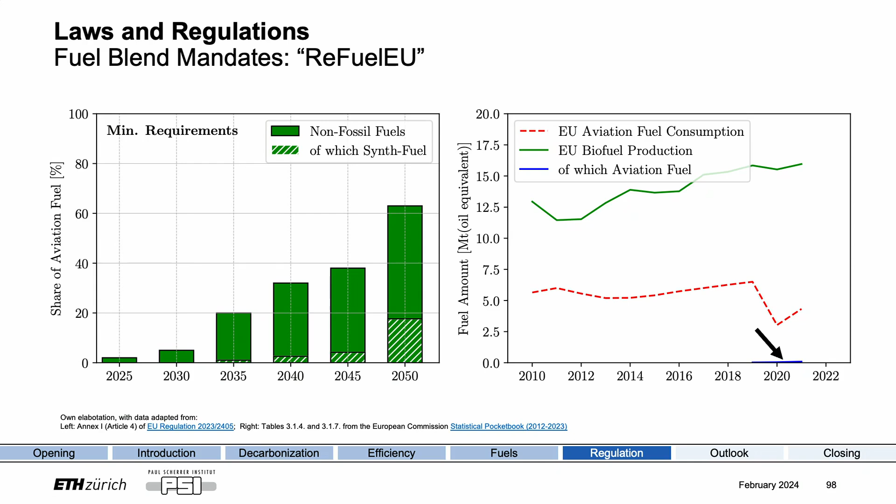But we've also seen that it's 3 times more expensive. So this is going to be a significant issue for airlines and for the paying customer. And as I've mentioned earlier, there's going to be competition between sectors. The maritime sector needs to decarbonize. There's laws for that, both nationally and at the international level from the International Maritime Organization. The automotive sector needs to decarbonize. Heavy industry needs to decarbonize. These are all classified as hard-to-abate sectors.

But there is some hope insofar as aviation is generally the most hard-to-abate sector, because unlike in the funny little Photoshop figure I had at the very beginning, you can't actually add pantographs to aircraft and electrify them. But what you can electrify is heavy industry, such as in open-pit mining. So both in Australia and in Canada, in the large open-pit copper mines, the lorries are now being electrified, and this is one less sector that would be directly competing with aviation for biofuel.

Carbon taxes at the European level, that's a whole other story. This is something that's been dragged through the media many, many times over the past years because there's been so much uncertainty associated with it. And it's a little complex, but the idea is this. Again, European Green Deal, Fit for 55 package, now it's a different law, and this law says that aviation, which was previously exempt from the existing ETS, the emissions trading scheme, is now added to the ETS.

So currently, the ETS says that there is a cap on total emissions in the European Union, and that cap is decreasing every year. All sectors. You're exempt if you produce, I don't know, less than 10,000 tons of carbon per year, I think. But generally, there's a cap. And sectors were able to trade with each other, and this is how some sectors made lots of money. This is the same principle Tesla Motors uses in California; it's one of their main sources of revenue. It's selling the carbon emissions they did not produce as offsets or allowances to other sectors.

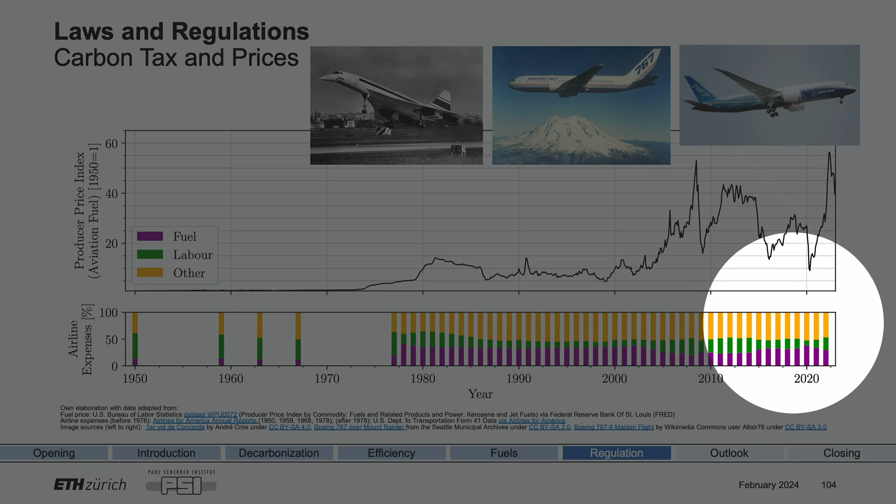And on top of that, carbon tax.

Who would like to object to that? Or what am I missing?

Well, one thing I might be missing is that consumer experience has significantly improved. There's no more third class unless you ride Deutsche Bahn, then the second class is essentially the third class. There's generally air conditioning unless you ride Deutsche Bahn, so that seems to be a recurrent theme here. So consumer experience is not captured in this metric. And dare I say, consumer experience has had a somewhat reverse correlation in economy class air travel. But point being, ticket prices have essentially fallen since the 50s, but will now stop to do so.

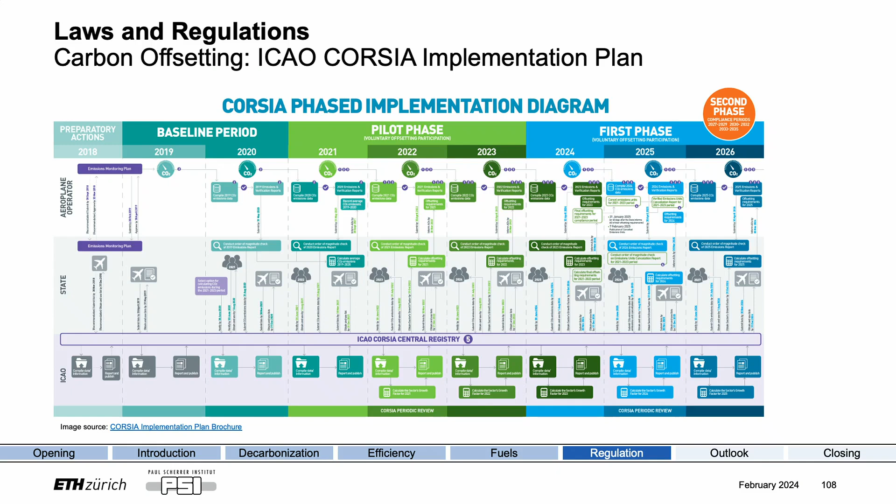You can see this is getting really, really complicated. And I wasn't joking when I said this was only half of it. So you can have a look in the relevant ICAO documents. There is transitional periods where you're paying only for the offset that occurs at the sectoral level. So if the entire aviation sector grows by 20%, you have to pay for essentially 20% more. And then at some point, the allocation changes. So then you have to pay for 15% of your own growth emissions and 80% or 85% of the sectoral growth emissions. It is really complicated.

And the emissions that you do have to pay for, which you're not already using biofuels or synfuels for, you can compensate by offsetting. So when compared to the European measures, it's not very effective, or it's very likely not going to be effective. This also results in a patchwork sky of regulations.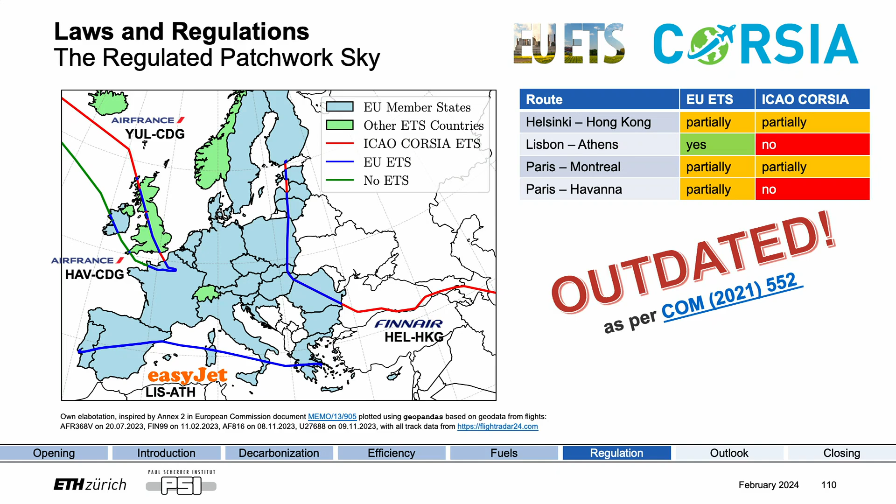So what you can see here is, this is again outdated, so I'm in a bit of an unfortunate position. Some of the lecturers, especially in Aviation 1, they teach things that are time-tested and true, will never change, and I have to update my lecture slides every year. But what you can see here is how the European Union envisioned this originally. A flight from Lisbon to Athens, you would pay EU ETS, so carbon tax on the entire flight.

A flight from Havana to Paris, you would have to pay only for the parts in European airspace, and on the rest you don't have to pay at all, because Cuba is not a signatory to CORSIA. On a flight from Canada to Paris, you have to pay EU ETS on the European parts and CORSIA on the other. And the same goes, for instance, for a flight from Helsinki to China, to Hong Kong, where China is a signatory. This would have, of course, been a nightmare, simply the reporting duties.

So they changed it to something looking more like this, where the proportionality was dropped. If you fly from Helsinki to Hong Kong, you have to pay CORSIA because it's not an intra-EU flight, and China is a signatory to CORSIA.

What they are trying to do is nudge countries into entering CORSIA, at the very least, by saying if, I believe, by 2027, the country to which you fly is not a member of CORSIA, you have to pay EU ETS, and that is a lot higher, of course. They will reevaluate whether CORSIA works. My guess is that this is going to be another fight with industry lobbies. But up until 2026, flights departing the European Union and arriving from abroad are not taxable according to EU ETS.

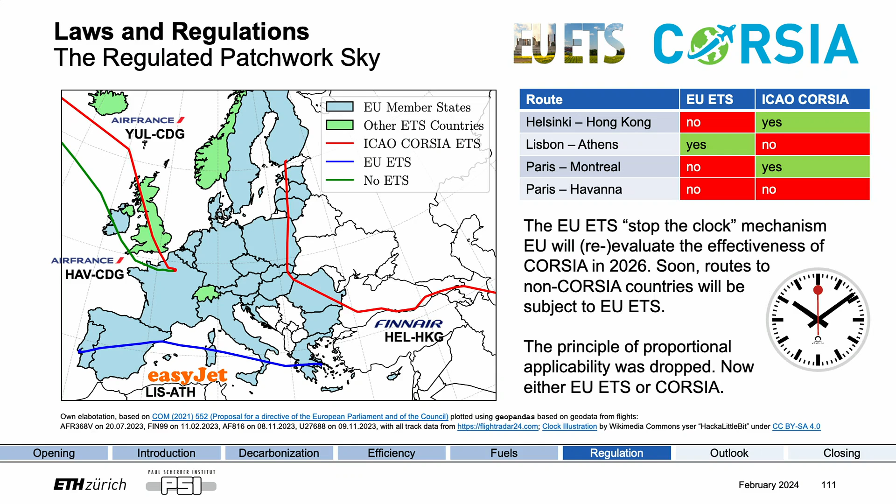And now for one of my favorite parts of the research I did into the legislation. How many of you at least heard about France banning domestic flights? Yeah, so it's been in the media, it's been in the news, it's been widely reported. How many of you think they've actually banned flights? Yeah, okay.

So in 2018, the Yellow Vest movement started, and I'm not going to go into the details because I'm also not qualified to talk about this, but in response, the French president convened a citizens' assembly of, I think, 150 randomly selected citizens, that were to provide suggestions of a more equitable transition to net zero.

The Yellow Vest movement started in response to higher taxes on fossil fuels. What actually happened is they provided some suggestions, and one of those was to ban domestic flights on routes where the train takes you there in less than 4 hours. Those would be most routes in France, because for all the centralized rail infrastructure, most journeys to and from Paris can be taken in under 4 hours.

When this bill became law, it was significantly watered down, now only applying to trips where the train takes you there in, I think, 2.5 hours. Additional measures were introduced, such as less than 2.5 hours, no change of trains, 8 hours of presence at the destination, and a certain frequency of trains.

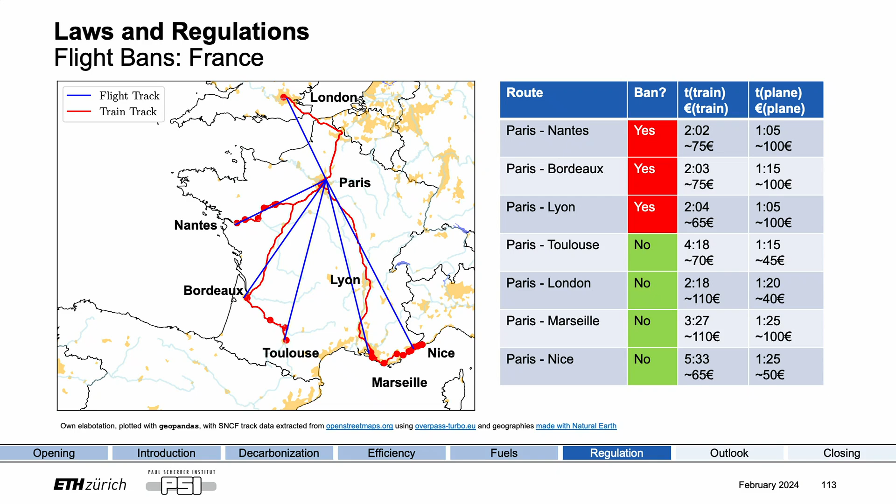Something similar happened in Austria, which I'm also going to include for completion. This is a de facto flight ban. As part of a bailout package during COVID, Lufthansa Group agreed to drop 2 connections, but this was entirely voluntary. Since the money has been paid back, I don't think there's any legal reason they still have to abide by this agreement, but they have kept it nonetheless.

If we were to make an initial assessment of these bans, well, they've been lip service essentially in France, especially in the context of the Citizens' Assembly. If you look at the data, there's been one survey of 18,000 French households, people that live along the routes that were to be subject to the bans, so Paris, Nantes, Bordeaux, etc. 90% of them take the car anyway.

A 2010's car, if 2 people are riding in it, has around the same CO2 emissions per kilometer per passenger than a fully loaded A321neo. So it didn't do a lot of things there. No hub route ended up being banned, and the same for the Austrian case. The 2 routes were 90% feeder flights.

One thing to mention is that for feeder flights, there are ways that seem to be working really well. Considering the economics and statistics, this is known either as rail and fly or fly and ride. This is aptly named the engine here, the Flugzug. It's essentially being able to check in your luggage at a major train station, and replace the feeder flight with a train connection.

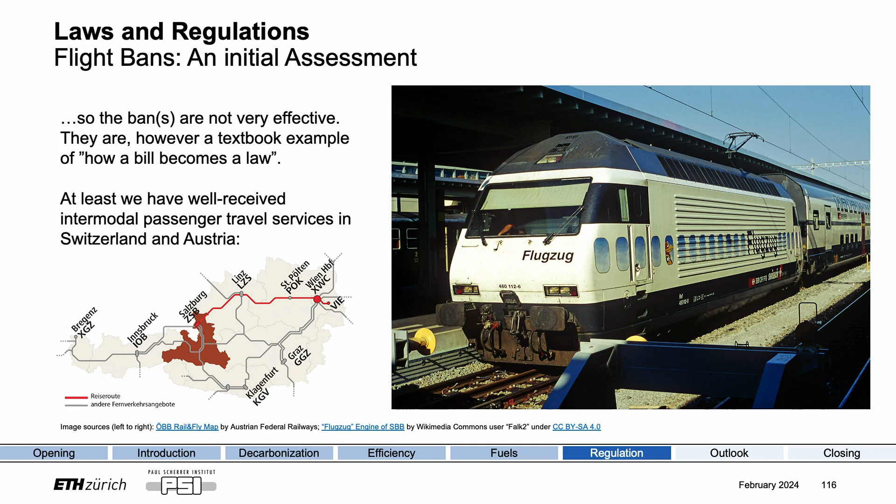Now, before we close, briefly on carbon offsetting. This has been decried, not just by researchers, but also by industry. Even the CEO of United called most carbon offsetting programs fraud. I think he was essentially correct in his assertion here.

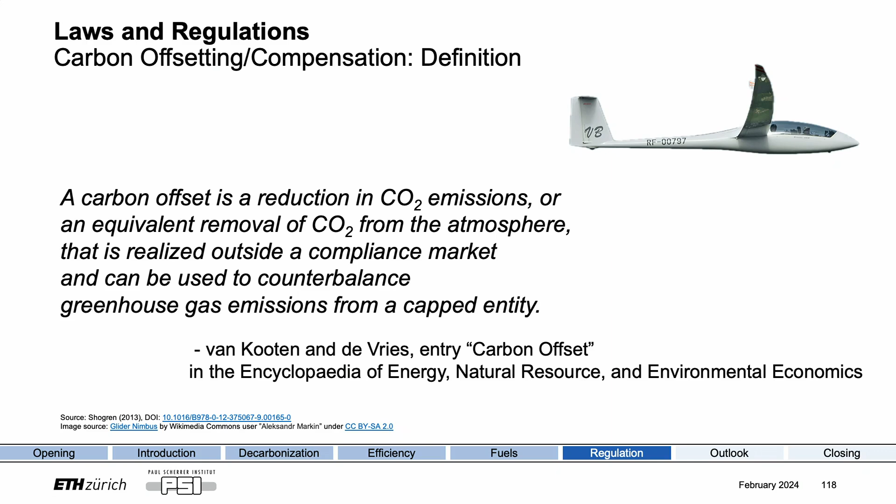I'm going to skip the definition. It's essentially, if you have a market that requires you to offset things, then your ability to offset things is called a carbon offset. But I'm going to mention the 4 properties of a good carbon offset: additionality, leakage, permanence, and verifiability. They're all rather self-explanatory. Additionality essentially means that the measure you take wouldn't have happened otherwise.

Leakage means that there's no rebound effect, which in itself is a bit of a moral issue. Permanence means the carbon is either sequestered or remains bound for some period of time. And verifiability needs no further explanation.

Of course, on the moral aspect of this, a naval blockade of an island nation would fall under all of these parameters and be an effective carbon offset. So there is clearly a moral dimension that needs to be taken into account.

If you look at the carbon offsets that airlines have actually implemented, take the Lufthansa Group. They're using Compensaid, which I think is a startup that was either acquired by Lufthansa or was an in-house spin-out. This is actually rather interesting. With Lufthansa, you can choose between offsetting your emissions now, which would be purchasing sustainable aviation fuel, or purchasing it X years into the future, and I think the X is capped at 10 years.

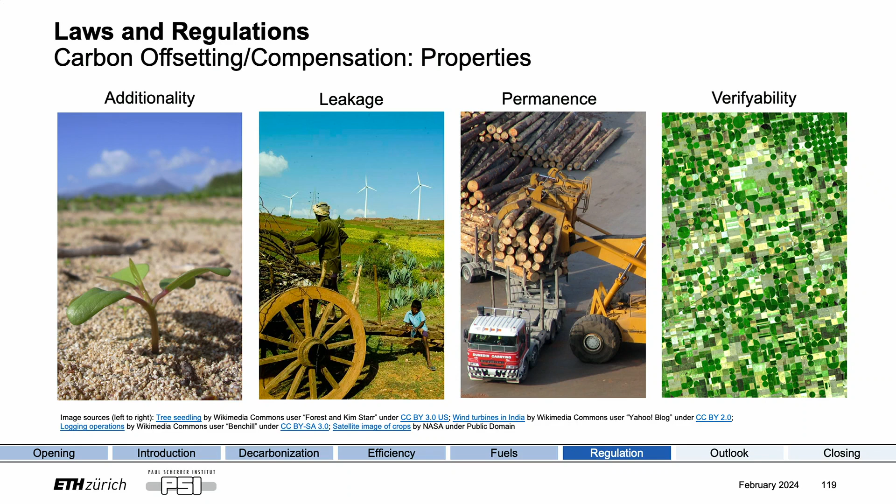Theoretically, most of these social projects don't qualify for leakage, but this should be a good reason for you to actually doubt whether leakage is a good metric to measure these offsets. So that essentially means, well, if we supply wind turbines to, does it actually say, to India, people will use more energy, or they will become more wealthy, and then they will spend carbon on other things.

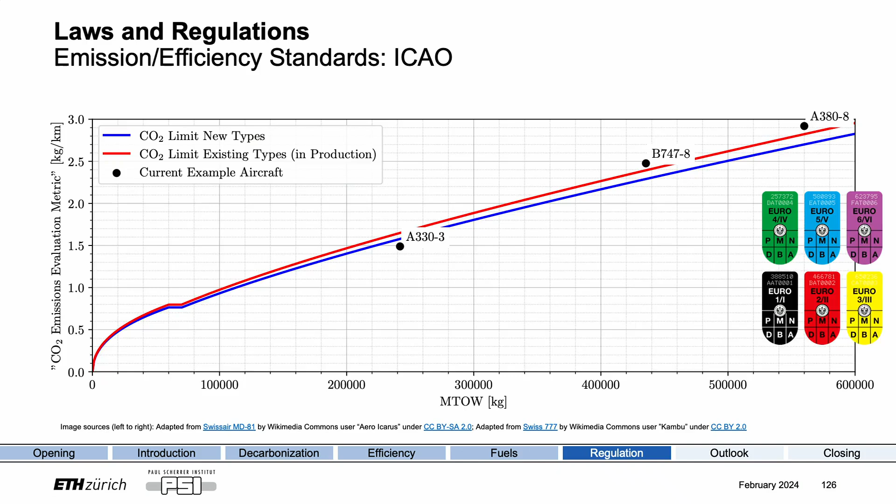Outlook. So we've talked about the 3 levers which we have to actually decarbonize aviation: increasing efficiency, decarbonizing fuels, and introducing various kinds of laws and regulations. Within laws and regulations, we've talked about mandatory fuel blending, flight bans to whatever effect they actually have, efficiency labels, etc. Now, where do we actually stand?

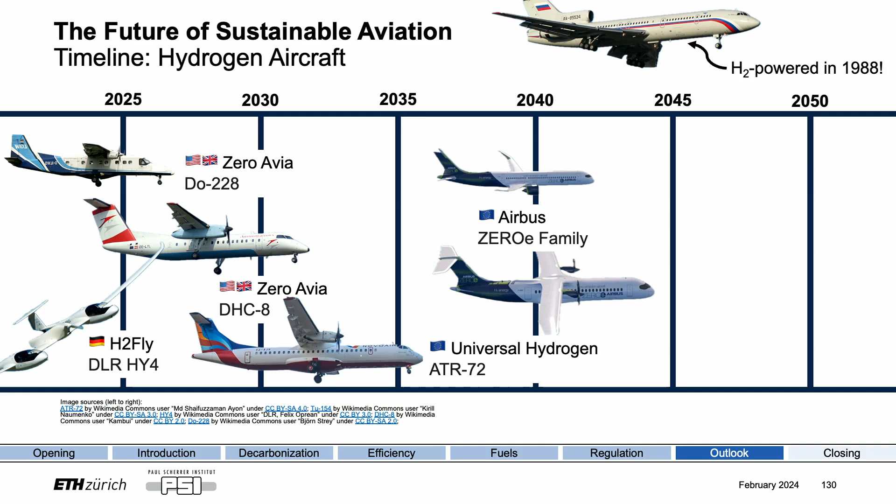Hydrogen aircraft, of course, have a long tradition. The Soviets tried to have aircraft be powered by hydrogen because they have large natural gas reserves all the way back in 1988, but that never really got off the tracks. There is a project at ETH, a student project, if you're interested, that is actually building a hydrogen-powered aircraft, I think 4-seater. But up until Airbus intends to introduce their new ZEROe family in the 2040s, I think it's very unrealistic to have hydrogen aircraft take to the sky.

Now, I've been asked about this, so I included it in the lecture, is supersonic, and not just supersonic, because who wants to travel between London and New York in 2.5 hours? We need to do it in 40 minutes. Hypersonic aircraft, all powered by green hydrogen. There's 3 projects currently, 2 in the United States, 1 in Switzerland, actually, in Canton of Vaud. But I would caution you against giving them too much credit or expecting their products in service anytime soon.

So unless NASA's X-59 QueSST aircraft, that is trying to reduce the supersonic boom into what I think they call the supersonic thump, has any chance of succeeding, this is very much unrealistic. Also, the question is, is there actual research interest? Do we actually feel the need for speed? Well, unfortunately, the answer is no. It's actually rather interesting. From the 1950s, the research interest in supersonic aircraft has remained roughly constant, very much unlike what I've showed you at the very beginning, interest in sustainability.

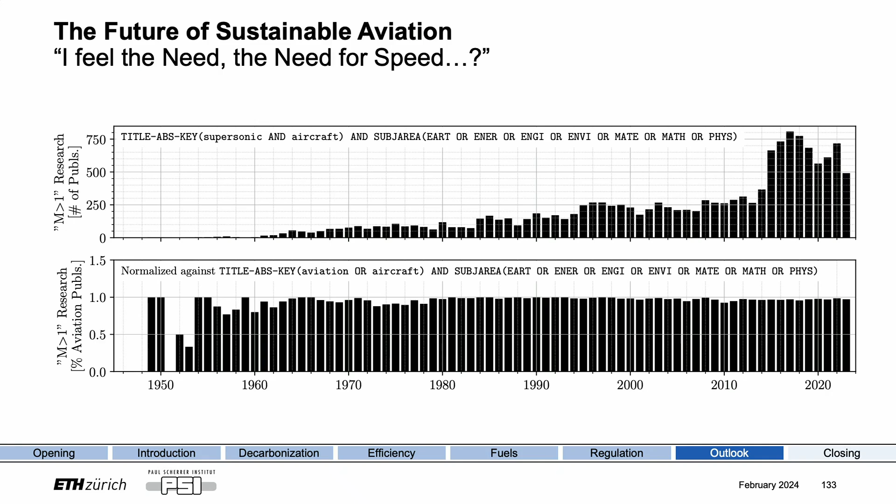This about concludes the lecture. I think the question that you should be asking is, do you have all the answers now? I certainly feel I don't. Otherwise, we'd have me on the cover of Nature Energy very soon, having solved all the economic and sustainability issues of sustainable aviation. It's going to be a question of how stringently the European Union and ICAO are going to implement these fuel blend mandates and carbon taxes, because otherwise we will have no incentive to switch to non-fossil fuels. I've shown you the price range. It's about 3 times what that costs you currently, with some of the pathways, the feedstock availability being a significant issue. But the good thing is that I'll be able to update this lecture every year, and then we'll see where this goes.

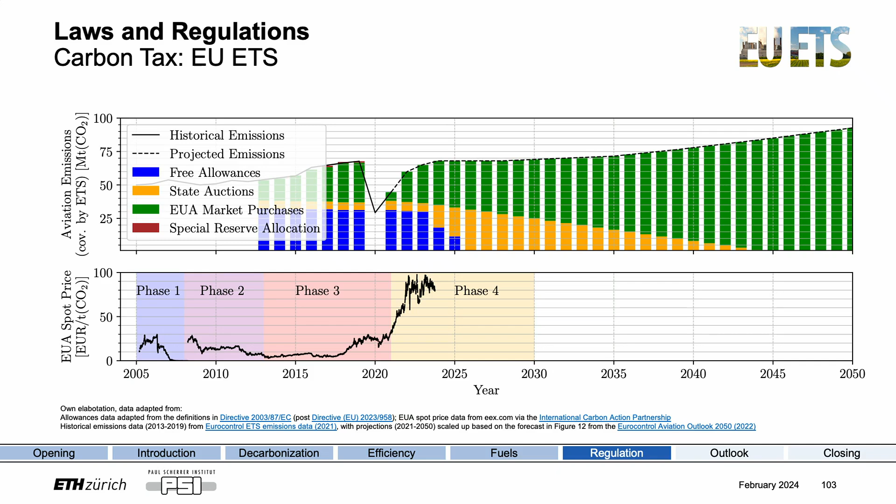I wanted to ask about the supersonic flight, where you said the problem is the sonic booms everywhere. But surely, for certain routes, especially those across the Atlantic or large oceans, you can wait until you're over the ocean to accelerate. Which is essentially what the Concorde did. Yes. So of the 3 players I've listed here, I think Hermeus and Boom, because these are private companies, essentially aviation venture capital, provide to their investors reports where they estimate the demand on specific routes. And interestingly, on over-ocean routes, the demand is very low.

You've got the usual suspects like Europe to the East Coast, but they forecast a large domestic market in the United States. And you can't really do anything there. To my surprise, there was almost no market from, for instance, the West Coast to Australia, which would be another opportunity to simply break the sound barrier. But I think it's going to be up to NASA to develop something along these lines. I just included this because they're all supposed to be powered by green hydrogen, which is the only way you can get investor money nowadays. So I would be somewhat skeptical of that.

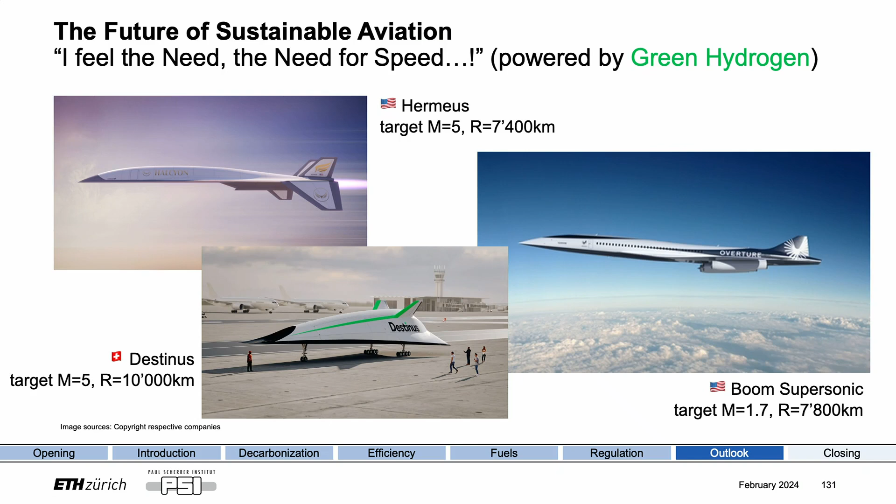Well, thank you very much.

Yes? Just related to that, do you know how the money collected by this tax is supposed to be used? Yeah, it really depends on who you're paying the tax to. So at the international level, it's offsets. So you can essentially decide who to give your money to. A project here, there. These are private companies that need to be vetted, but that's it. In the European Union, there's two funds. One is, I think, called Structural Development Fund, and another one, I think, has the words equitable and transition somewhere in it. And then it's up to EU lawmakers to determine where that money goes.

The idea really is to develop infrastructure in some of the countries that joined the European Union after 2004, research into whatever, it's tax money. So there's no legal requirement for it to be spent on things related to sustainability, I think.